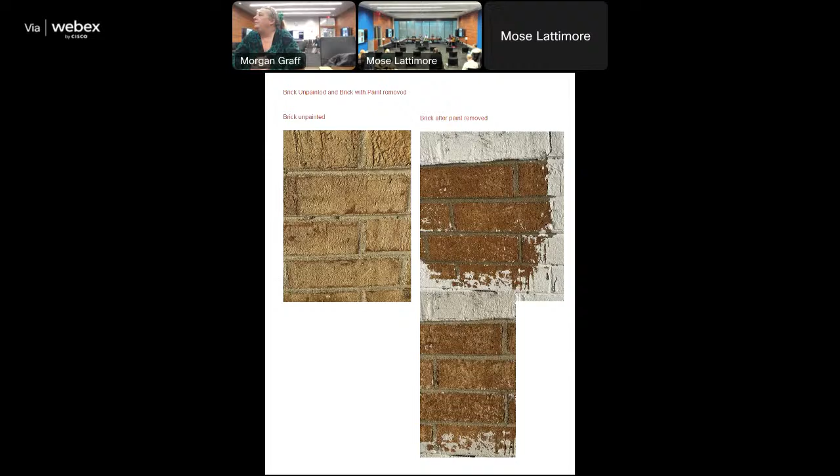Since you stated your name, can I get you sworn in? Do you agree to tell the truth and nothing but the truth? Yes, sir. Thank you, Ed Morgan. For the proposed work description, this is to retain the painting of previously unpainted masonry, paint house with mineral paint for submitted options. Staff analysis - I'm going to read through the last commission meeting minutes, if that works for the commissioners.

Sure. Following is taken from the unapproved November 8th, 2023 Victorian Village Commission meeting minutes. Commissioners asked the applicant whether they had any other options, as the commission is steadfast on this matter. Commission did not feel that another color would be appropriate either. Ultimately, the brick should be brick and it should not be painted. One commissioner pointed out that it is 1970s brick, not 1870s brick, so it is a very hard brick. Brick from the 1970s is not any different from the brick being made today.

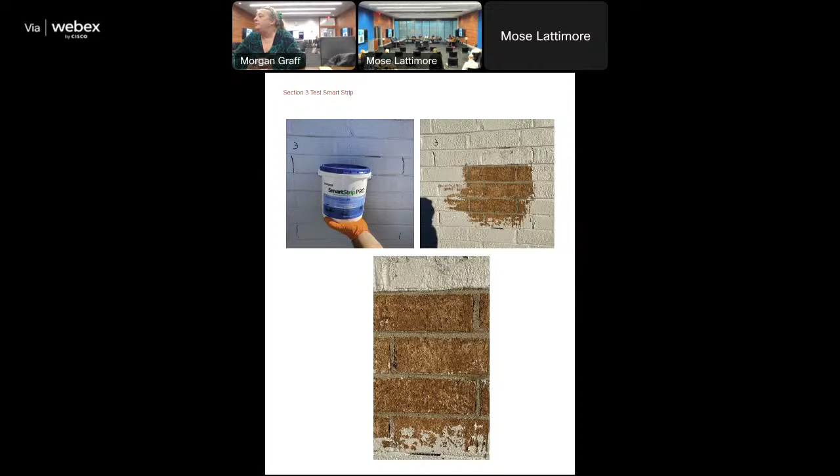With 1870s brick, you do need to be very careful as it is very porous, but paint is still able to be removed from the surface. The commission stated that they need to be very careful about setting precedent and need to adhere to Victorian Village guidelines. The applicant was encouraged to reach out to other experts for further advice about removing the paint. The commission noted that they still need more information about the product used and how it was used - for example, the dwell time and temperature applied, and any other information that affects the performance of the product - and asked the applicant to provide information about additional products that may be available.

The commission noted that different removal products work differently and some may be more effective than others. The applicant was encouraged to reach out to the paint manufacturer to get their opinion on whether the paint can be removed and what to use to remove it, or provide a letter from the paint company stating that the paint cannot be removed. The commission doesn't have enough evidence at this time to conclude the paint can be removed, so the additional information requested would help with this decision.

One commissioner suggested that a distressed painted whitewash brick with a 1970s mansard roof might be preferable to the fully painted brick. Another commissioner asked whether the commission would rather see an attempt like the distressed brick, or if they want to see the brick fully restored. The commission agreed that they currently don't have enough information to make the decision at this time.

The applicant was encouraged to look at other similar properties in their neighborhood for an idea of what could be accepted, and recommended to reach out to Columbus Landmarks for contractor recommendations. They may request that staff do a site visit in the future to see how the brick has reacted to the paint removal chemicals. Included with that is the November 9th, 2022 minutes and the October 12th, 2022 minutes.

As stated in the letter provided by the applicant and the materials, they have applied 3 different paint removers, which included Strip-Ease, Jasco, and Smart Strip. The paint remover products were then removed with a 4,500 PSI pressure washer after being applied for a 3-hour period with 60+ degree temperatures, and links to videos are included as well in the materials.

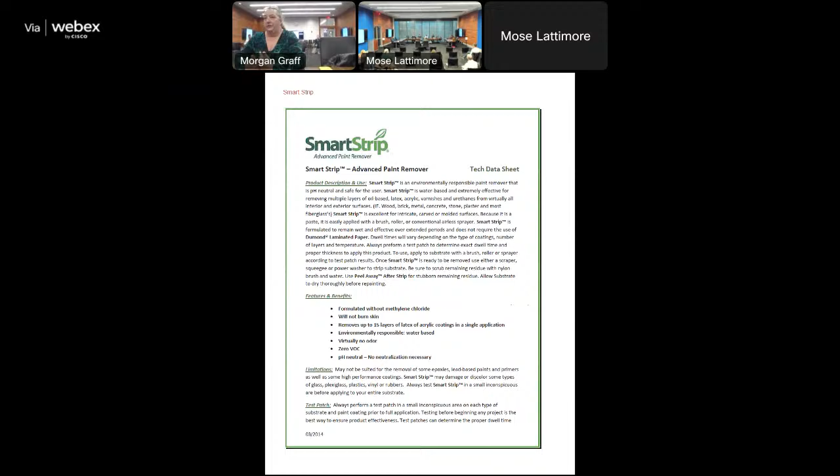The power washer, along with the stripping product, resulted in the bricks having damage and not taking them back to their original appearance, but to an orange stripped-down appearance. I'm afraid that with this other, more acidic product you have to use, it will also strip down and take off whatever coating was on them prior to us painting the brick.

We're concerned that it won't have a uniform appearance under the best of conditions, and trying to do a 2-story removal of paint is not the best of conditions. We think the building at this point would look best if a paint color was accepted by the Victorian Village Commission and the project was completed.

Or alternatively, because one side of the building is not yet painted—it's like 5/8 painted—don't paint the side that isn't painted, but just finish the painting on the sides that are in a color acceptable to the Victorian Village Commission, and not try to remove any more paint and do any more damage to the underlying bricks.

Thank you, that was very helpful. All right team, just thoughts, comments—I think the photographs, I think we have everything that we need or have been asked for. I think there's still one test that's left, the recommendation from landmarks, but I understand the concerns in terms of where we are seasonally right now, so this will offer some thoughts.

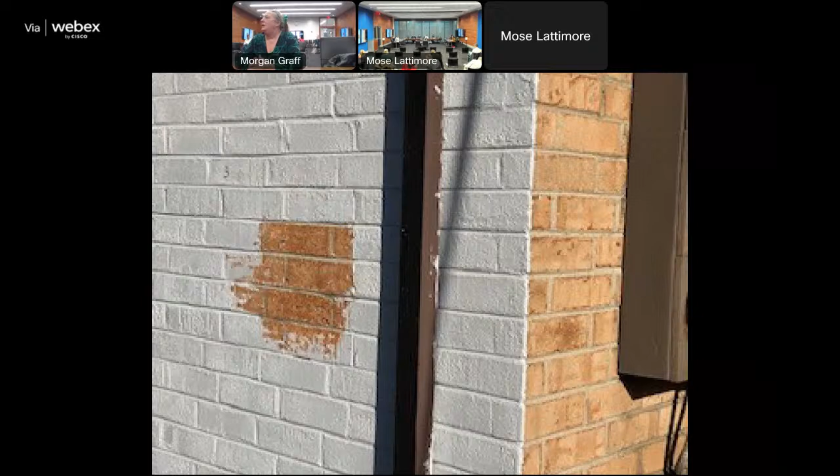Understandable, so I just think about that, and I'm not sure we can do it now during this hearing, but the applicant may be taking inventory of some properties in the area that may have similar conditions. I'm not sure if staff could help assist in that manner. We can try to find examples if there are any in the neighborhood, okay, just that.

Maybe that's an exchange that happens in this duration of time to better prepare for the outlook. With this motion of continuance, is April a good deadline, or should we extend it to May? I think it needs to be May because we don't have consistent weather in April. So yeah, May, it's a 24-hour application, to try for 24 hours. If we were to try that, it would be a little iffy, so May 2024. But we might be able to get something done prior to that. We will certainly try to, and if we do, we'll submit prior to that.

Okay, very helpful. All right, I think we have everything. Reed, do you want to introduce yourself, or wait? Wasn't sure if I needed to sit out since I've been coming late. Probably just through this application. Okay, I'll just abstain. And then we can call into record that Commissioner Dodson.

Is there a motion of continuance with the understanding that materials be provided in May 2024 to allow for these other landmark recommendations to be executed?

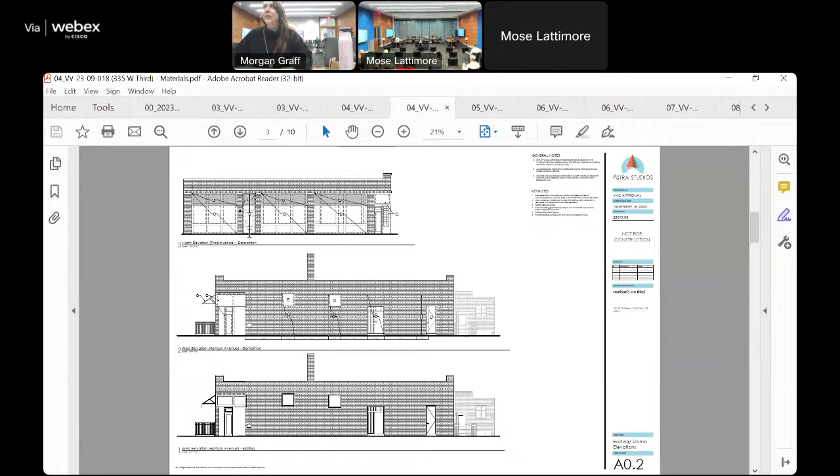Just teasing. Perfect. Can you state your name, get you sworn in? Amanda Dunfield. Do you agree to tell the truth, the whole truth and nothing but the truth? Yes. Perfect, all right, we're ready.

Proposed work description for 335 West Third Avenue: replace existing storefront windows on the north elevation with new wood glass storefront within the existing openings per submitted documentation. Install new masonry storefront openings on the west elevation per submitted drawings. Install new canvas awnings with steel frame tubing on north and west elevations, similar to the existing design per submitted documentation. Preformed metal gutters would run along the perimeter of the entire canopy. Install new patio space along Harrison Avenue and the rear south of the building.

Rear patio would be partially covered over the exterior bar with a new steel channel canopy per submitted documentation. The area would also include a new 36-inch cedar planter and plantings, as well as a 42-inch metal fence on the west elevation and a 72-inch horizontal cedar fence on the east and south elevations per submitted documentation. Planting beds would also be included on the east elevation, and four trees would be included along the fence line of the south elevation. Staff analysis.

The following minutes are included within this: November 8, 2023 — there's a lot, so no worries — and August 9, 2023. Staff recommendation: staff recommends approval of application VV 23-09-018, 335 West Third Avenue, as submitted.

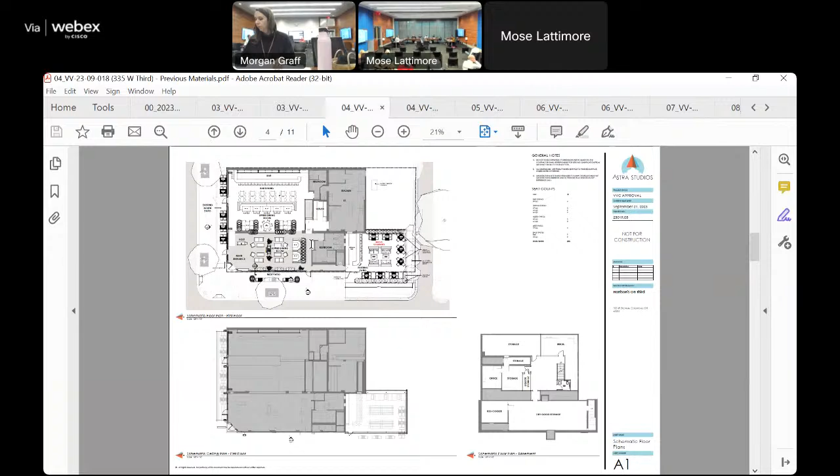With any and all clarifications submitted to staff prior to issuance of the certificate, with the following conditions: to select option 1 or 4 from the proposed sconces on the building, currently referred to as LT1 on the elevations; lights to be installed via mortar joints; and revised elevation drawings to indicate the location of the LT2 patio awning downlights to be included. Basis of staff recommendation is City Code 3116.11, standards for alteration, Short North design guidelines, commercial patios and outdoor dining, as well as lighting and signage, and projecting blade sign guidelines.

Thank you. Thank you, Morgan.

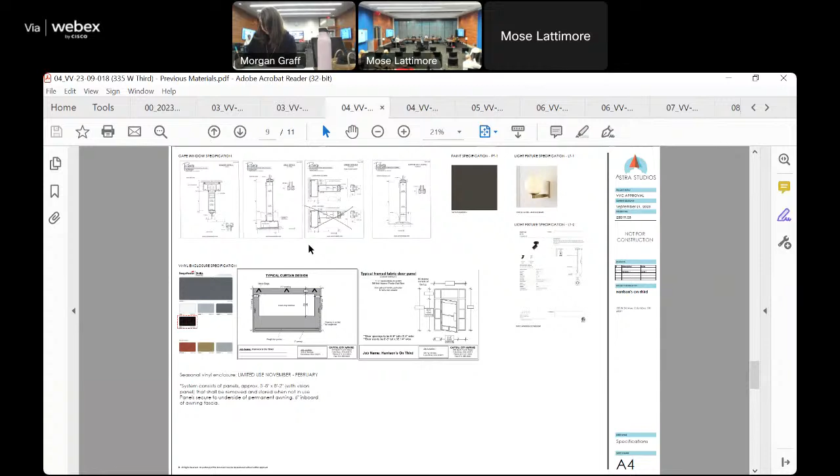I hope so. I don't know if we necessarily have to go through a whole presentation because it seems like everything's favorable in terms of going in that direction. But just high level, some of the things staff is recommending, is there anything we should really focus on regarding those items?

In your presentation too, so the things that changed from the last time we were in this meeting is we showed the awnings as they are on Third Avenue. They're going to be replaced in that same rhythm, right?

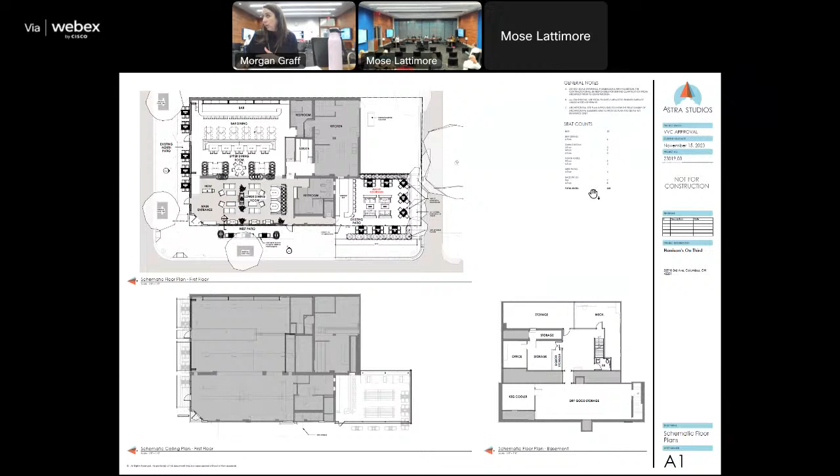And then the other thing was including options for the light fixtures, for the exterior light fixtures. And staff said they liked 1 and 4, is that correct? We would recommend either or.

Do you have a preference of the two? I don't know, I think one is more classic. The 4 is a little bit more modern. So LT1, I think, is probably it's simple and clean.

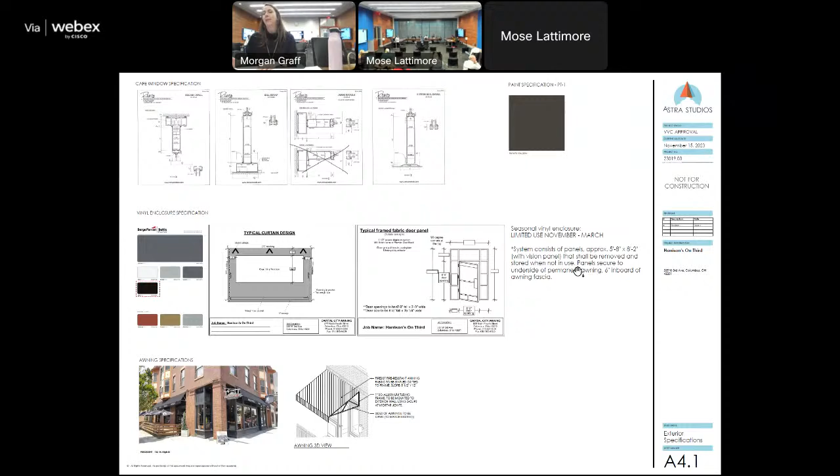It seems like LT1 and LT2 have a very similar fixture family, kind of presence to them, so it seems like it would be applicable.

So the only thing I was questioning, because I think everything else is here - as we go down into detail, I think we've asked before, we see there's planting material, but we don't know the age of it or anything like that. That's the only thing I see on this that really is not in the picture. Everything else is here, I would agree with that.

What the actual plants are going to be, specific species. So you feel like we could plant a 6-month-old boxwood and say, well, in 4 years they're gonna be 4 foot? Sure, that makes sense.

Now it might have been part of another application - was it in beforehand, previous materials? Yeah, I mean, I know we've had some of them called out. I'm just wondering where they are.

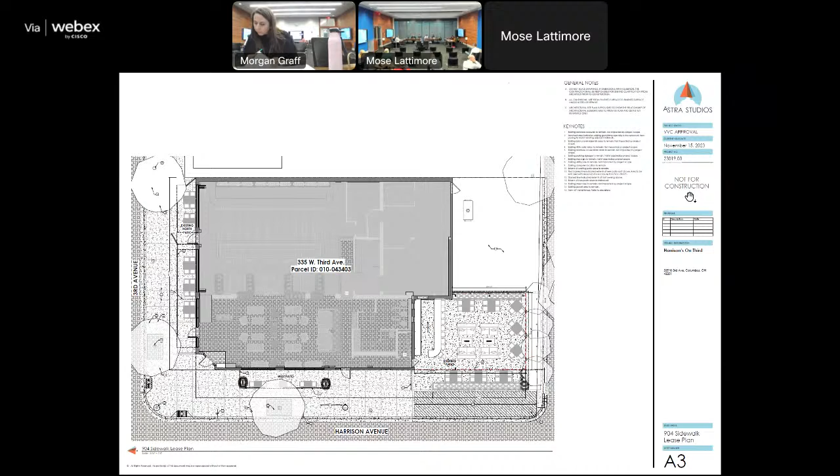And I'd be open for that being a broken out section, split out section that staff would put up, well just a separate little committee or subcommittee that can do that quickly. I mean, if you don't have it...

I'm seeing partial information that, you know, it's river birch or equal, or a note that says plant screening, but I'm not seeing anything that says exactly what it is. Installed sizes - I mean it might be all there, we just don't see it.

No, I know, we've done so many versions of this, granular. I mean, of course that level of information for plantings would normally come later on in this whole process.

Yes, so if there can be a staff approval, and I guess when we get ready to submit for permit, there needs to be a review to make sure that what has been agreed to here is actually showing up in the building permit. Is that correct? Yeah, so at that point it would make sense that that information would be in there.

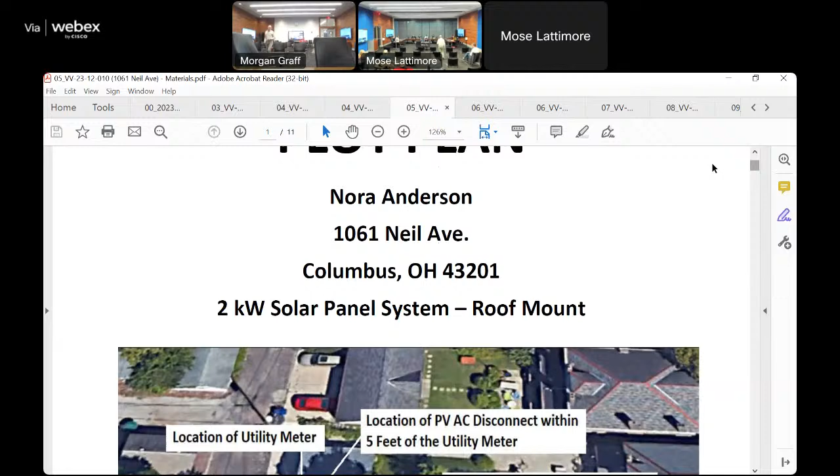Do you want to state your name, sir? Hello, and I'll get you sworn in. Sure, Peter Anderson. Do you agree to tell the truth and nothing but the truth? I am. Thank you, sir. All right, go ahead. Thank you.

For 1061 Neil Avenue, I'm going to abstain. Okay, that's it. You can stay there or you can, yeah, perfect. Welcome. Thank you, Commissioners. You're welcome.

So this is to install roof-mounted solar panels and accompanying equipment on a detached garage facing the alley per submitted documentation. Staff analysis: Columbus is to be 100% renewable energy by 2030 and carbon neutral by 2050. Clean energy can include sources such as wind, hydro, and solar. Use of renewable energy such as solar collectors is encouraged and should be designed, sized, and located to minimize any effect on the character of a historic building.

While the Victorian District guidelines do not currently address solar energy specifically, guidelines should be based on recommendations of the National Park Service. These include: preferred locations for solar collectors include sites raised in a rear or side yard, on the roof of an addition or secondary structure, or on the rear portions of the roof on the primary structure.

Locating collectors on the front portion of a roof oriented to the side yard is acceptable when preferred locations are not feasible. Minimize visual impacts by setting collectors back from the facade of the building. Install a collector in such a way that it can be removed and the original character easily restored. Mount collectors flush below the ridgeline on a sloping roof.

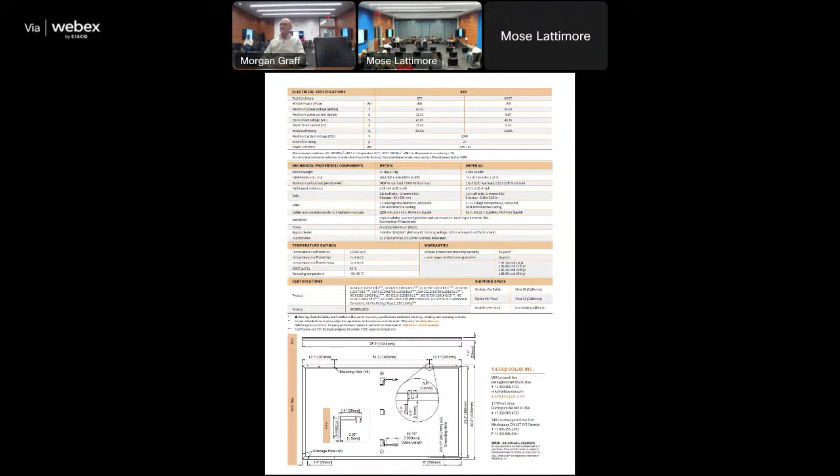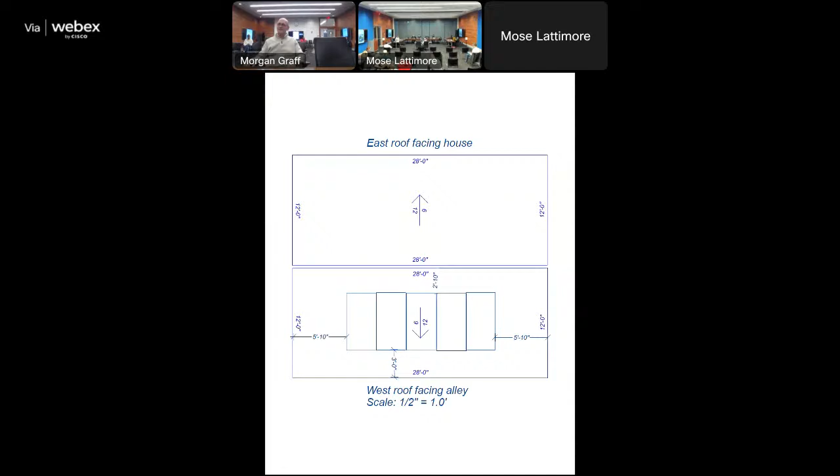So we looked to the garage. As you can see, the garage has a westerly facing roof — that's the proposed roof — and an easterly facing roof. We explored and did modeling on the easterly facing roof, which faces into the yard, but we have substantial trees that would need to be cut down to make this a productive site, and I'd prefer not to cut down the trees.

So with regard to the site, the only viable option would seem to be this westerly facing roof of the hipped garage. Some examples were provided for other garages — I think one may be in the neighborhood — and the garages I've seen have simple roofs that face north or south, as opposed to this one, which has the roof facing east and west.

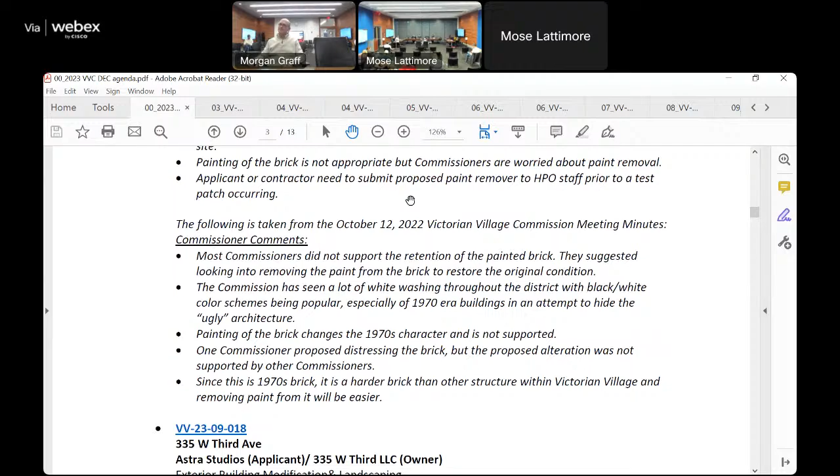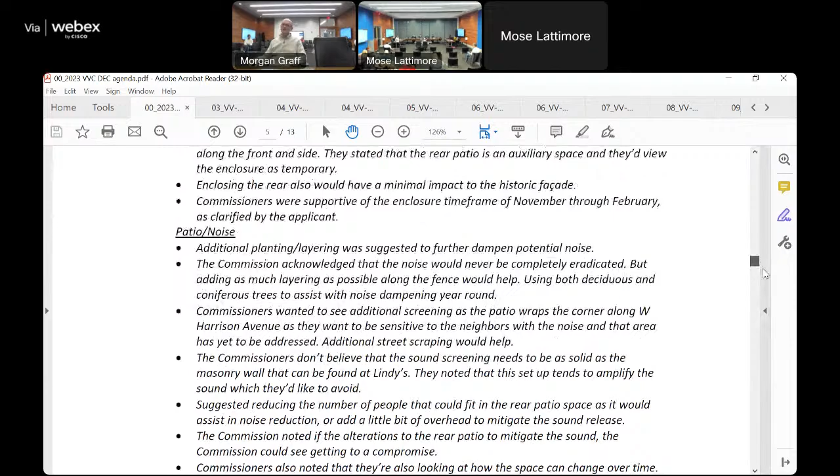Anything else, sir, before we talk through some comments? I think those were the two key concerns, and I wanted to make sure I addressed those. Yes, sir, they've been addressed — very helpful.

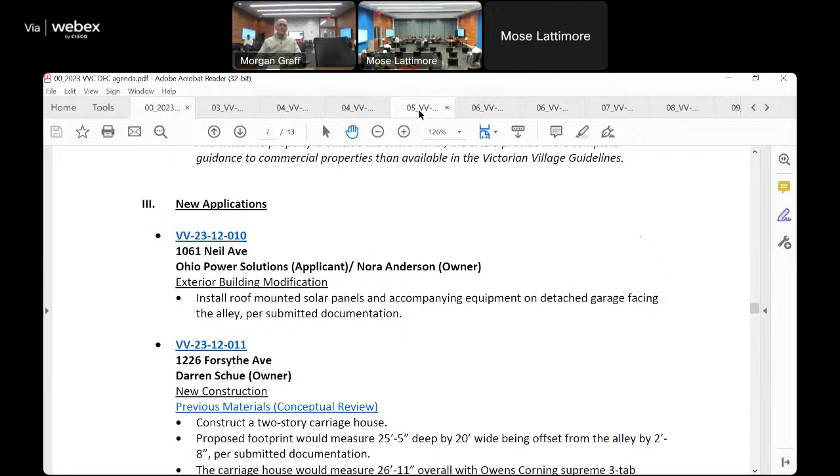My only comment — I'm okay with this application — is, when it becomes present on the alley, is it reflective? Is there a matte finish? Do you know what the finish is, as far as neighbors and windows go?

I mean, obviously this is where you're going to maximize flat panel, all on one surface, not very high up. But what is that finish? Because I would be kind of upset if in the winter or spring, wherever the sun rises, my curtains get fried because there's a reflection.

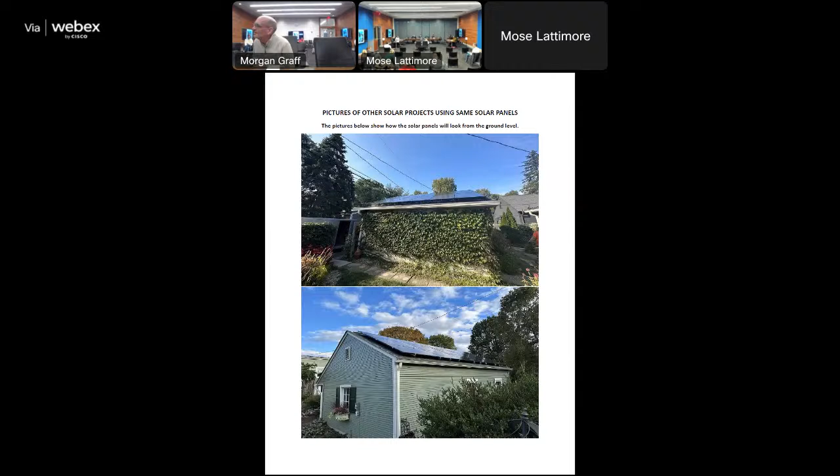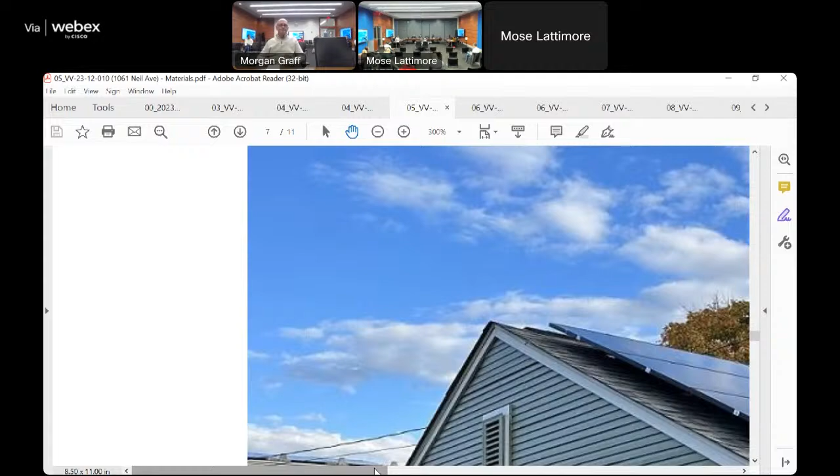I'm not the solar expert on this — there are pictures of two other garages where you can get a sense of what they look like. It would be helpful for us as a commission, since we're learning as we go with things like penetrating the garage and the disconnect boxes, if the solar company could provide samples — there might be a very reflective surface, a medium one, or a matte one. In your yard those things aren't reflective at all, but in other applications there is a reflection on that cell, so it would be nice to be able to see that.

So we would kind of know that going in, because what we're looking at there is sort of reflective. That would be helpful for us. I think you've answered all our questions and met our requirements. I'm not an expert enough on the type of glass, whether there's reflective or non-reflective versions. Can your supplier get those? I think so. I think the product is mentioned here - Silfab is the manufacturer.

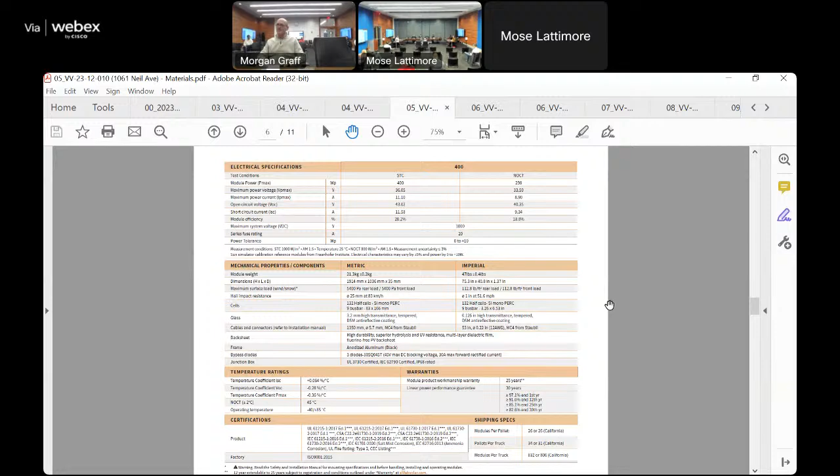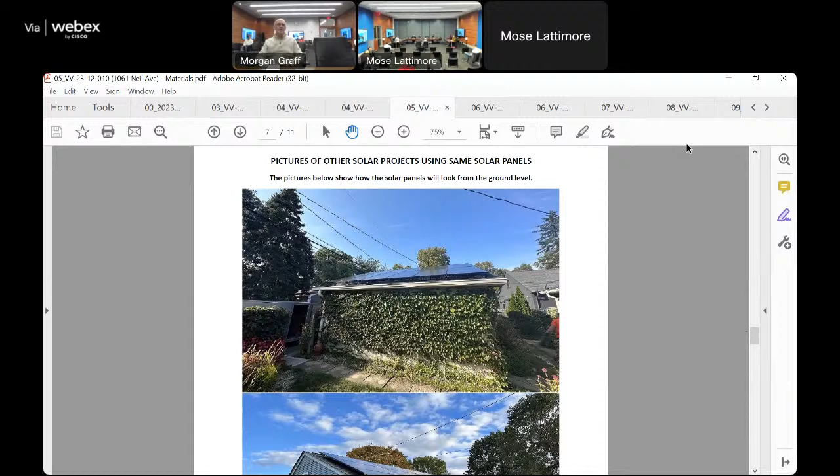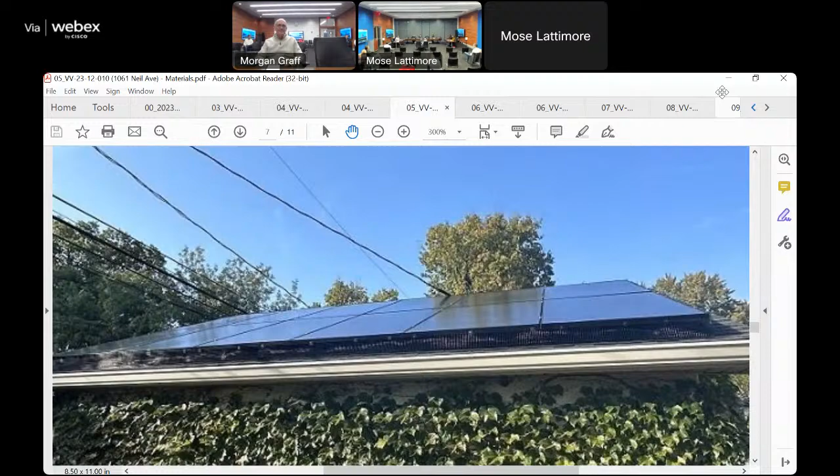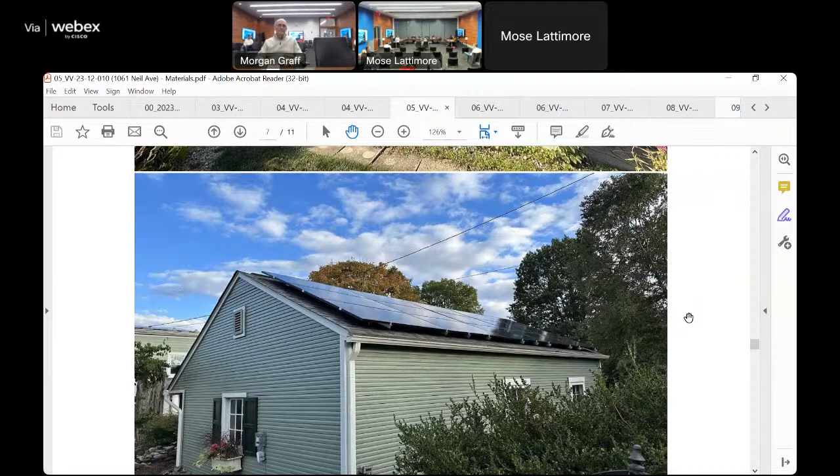I think that would be helpful. Would it be a recommendation that if the product comes in a non-reflective surface, that be used? Or what would you prefer? I'm not sure non-reflective panels are available, but if they were, the recommendation would be to use those. I mean, I'm not an expert on it. All I know is when I see the yard light or the thing on the side of the building, it's not reflective, but I see other installations on bigger things where it's definitely a reflective surface. That's what I'm trying to figure out. I'm sure we're into third or fourth generation cells by now, so they probably have different finishes. It would be helpful for us to get samples from your manufacturer, to make our lives easier.

Does it help that it has an anti-reflective coating specified? I don't know what that means though. Well, by design, the goal of a solar panel is to collect the sun, and anything that radiates back or that you'd see as visible light makes them less efficient. So it's in their best interest to have it be as least reflective as possible during manufacturing. So to your point, I don't know exactly what that looks like, but I don't think I've ever seen anything specified with different finishes, though I'm not an expert on it either.

I think that's fair. There's probably some inefficiencies, or maybe economies, related to looking at the main house - there are existing penetrations and such. But personally I still have a little fear in terms of the sense of presence, and how we can maintain an ability to screen them to be in alignment with other installations. I remember there was a pretty complex install proposed for an address on Second, that was on the second floor, broken up into locations.

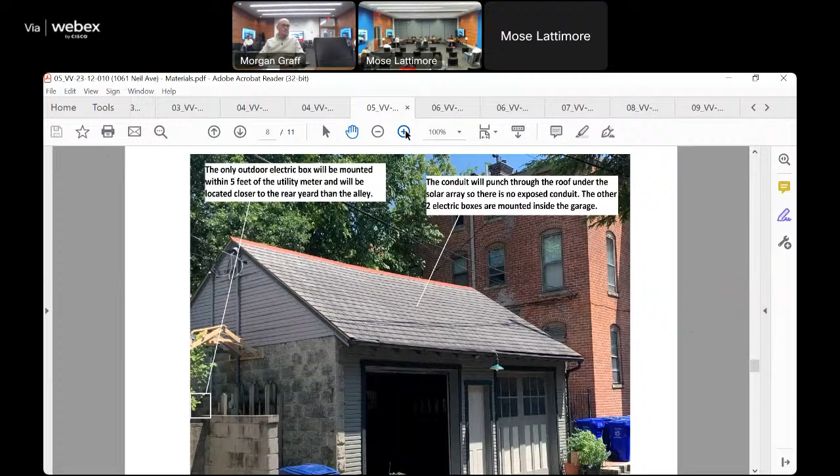I think you're right, you probably have a code problem if you try to put them on the back of the house, or on the south-facing side. My guess is there may actually be a code violation if you try that. I think we can only fit 4 panels, because fire code requires a setback from each of the ridges and valleys and any penetrations, and it's just not worth it - there'd be conduit running around to a disparate set of 4 panels they'd try to fit in.

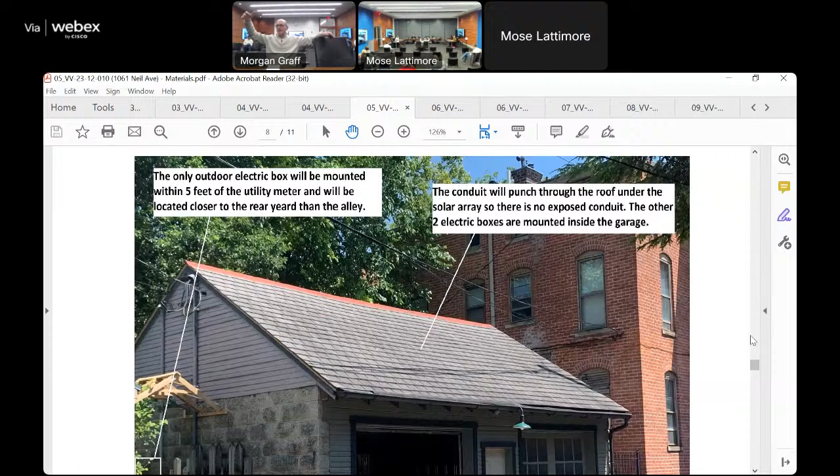Is there anything on the existing home - I'm talking about the existing southern face, on the smaller addition? Got it. And it's a four-square, hipped on all four sides, which leads to a more complicated roof pattern.

That was my preference, because it would be much more productive - high up above the trees, southerly facing - but it's not economically viable from a maintenance standpoint, nor from a productivity standpoint, with all the labor of putting in conduit and wiring, only to have 4 panels that can be positioned. I could potentially get rid of skylights, which might add a panel or two, but it's too complicated a roof.

It's your concern setting precedent. Yeah, completely, 100%. I think that we, as a collective, over the course of the last few years, when these things have been introduced, that's been the narrative. I understand some of the constraints, I just want to try to stay at least somewhat consistent. I heard in the National Park Service guidelines that secondary structures would be preferred, which is what this is. It's a secondary structure, for sure.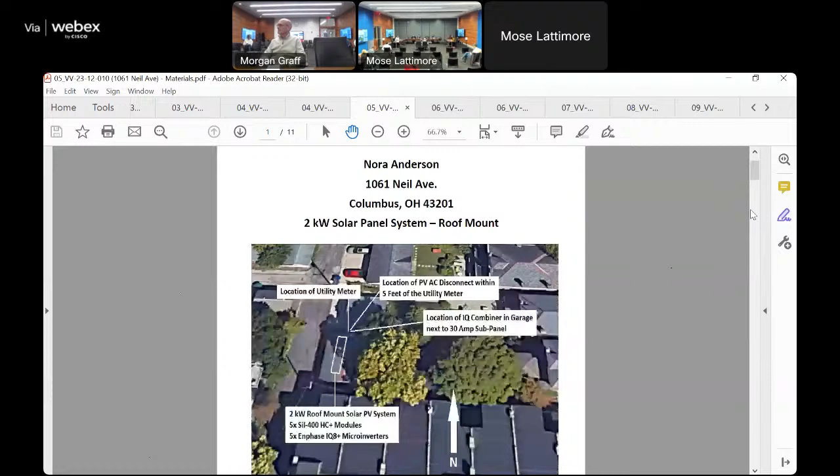We talked at the business meeting, and precedent is a concern. Could we wade the toe into the water by saying, well, it's on an alley, it's not on a street? It's on the middle ground. We're gonna get more of these, for sure. So I don't know that it's in the commission's best interest to be the guys saying no to all the solar applications.

Well, in looking at this, you look at anti-reflective - there's anti-reflective coating and there's anti-glare coating. So we don't know. Yeah, and I'm not an engineer.

The next question I would ask, if you really want to go there, is what are the angles of the sun and show me where they would face. Well, that's why we do sun studies in certain applications here. But I'm saying we can't be doing sun studies for every solar installation. No, but what I'm saying is this: we don't have enough information. All of a sudden we have this installation with this coating and it works within these parameters.

So we're not doing one-offs all the time, we start to build a kit of materials that are acceptable within the commission. We started with: does it penetrate or is it on the outside? Because the first ones came out on the outside, went along the side, and we said no. So we're building up this stuff. I think we need to know what we're deciding and not just go 'oh, it says it's not reflective' or 'oh, it says this' - because this is how we learn here.

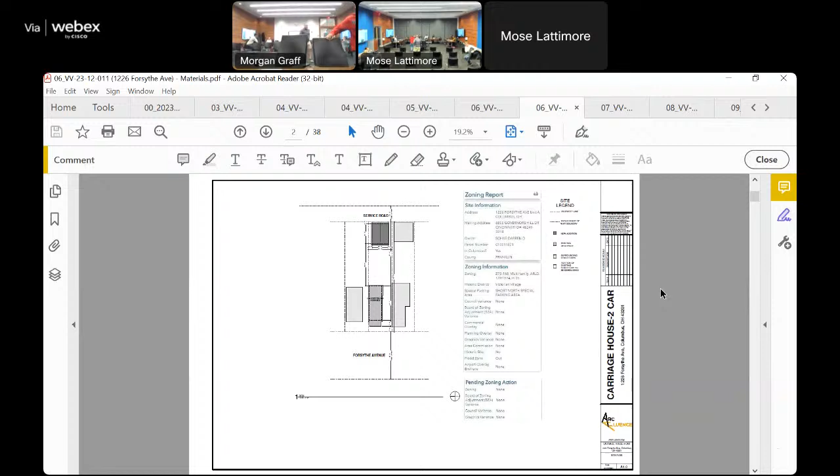Switch chairs. Look back there again.

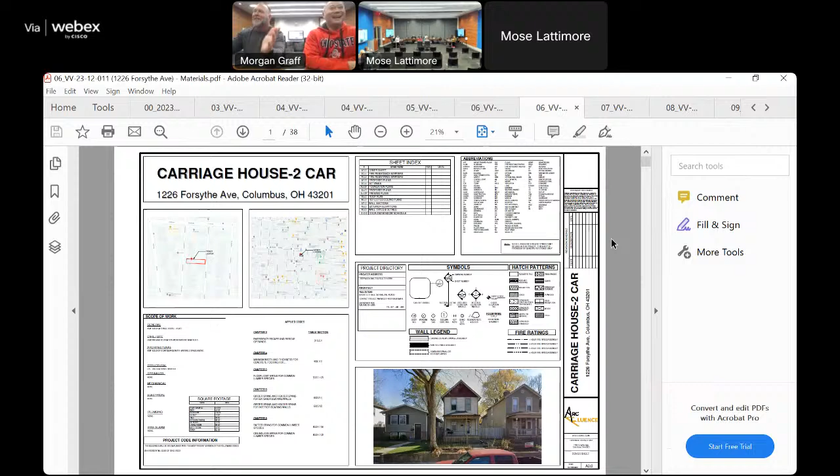Hello, family. Can you guys state your name, get you sworn in? Daniel Shu Hollander, Shad Morris contractor. Do you agree to tell the truth and nothing but the truth? Yes, sir. All right, thank you guys. Go ahead, Morgan. Thank you.

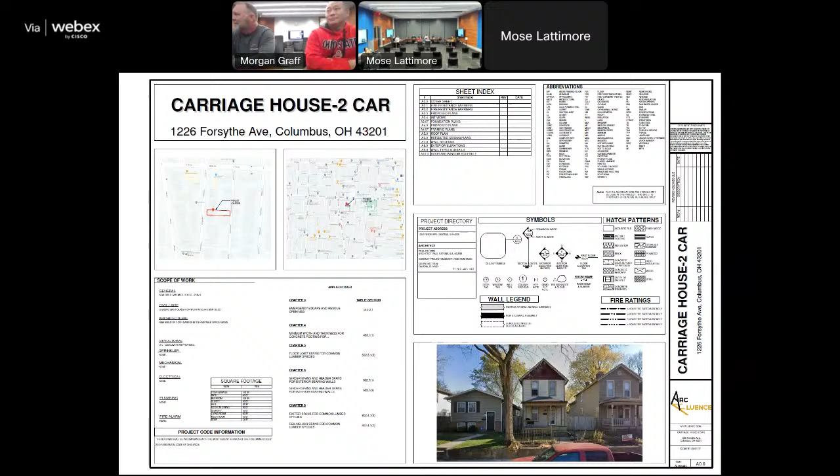Proposed work description: construct a two-story carriage house. Proposed footprint will measure 25 feet 5 inches deep by 20 feet wide, offset from the alley by 2 feet 8 inches per submitted documentation. The carriage house would measure 26 feet 1 3/4 inch overall, with Owens Corning Supreme 3-tab shingles in estate gray. Windows would be Marvin Elevate 2/2 double hung.

Staff analysis: the following is taken from the approved October 11th, 2023 Victorian Village Commission meeting minutes. Commissioner comments on the proposed carriage house: the massing looks off. The house and garage need to talk to each other, and the carriage house should complement the house. Commissioner suggested scaling it down.

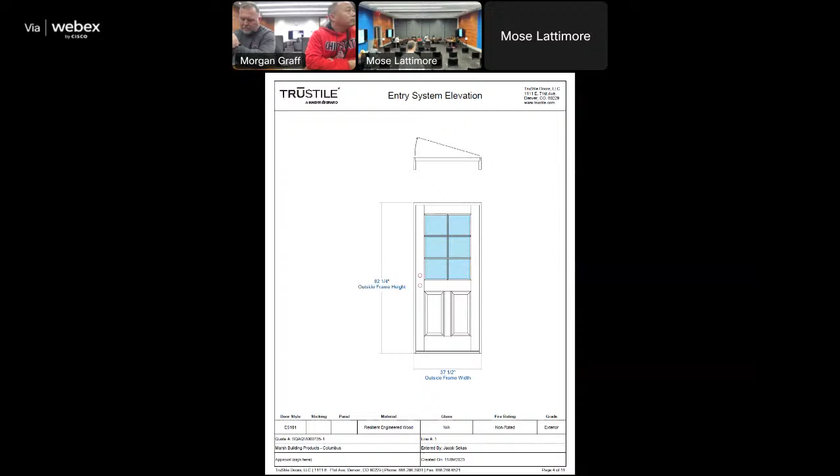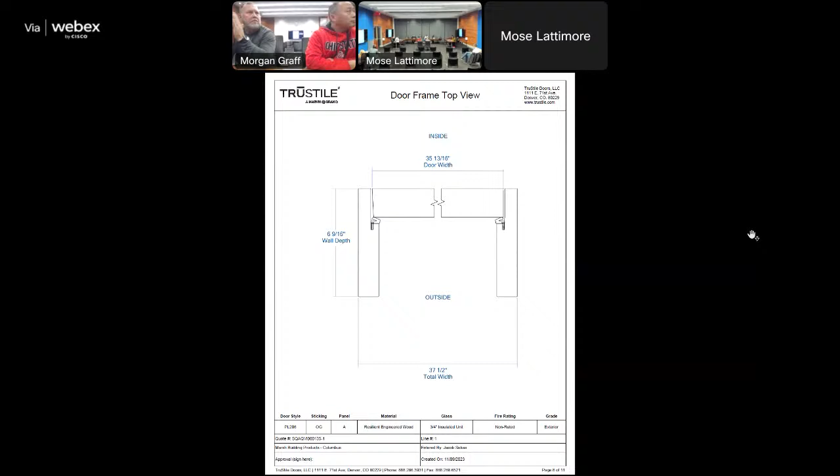A story and a half may be better to fit into the existing context than the proposed two. Having 2 dormers on the sides with a front-facing gable roof mirroring the roof of the house may also assist the structure in being more appropriate. The applicant was encouraged to look at the proportions of the lot and site to ensure everything balances in the end. Preliminary scaled measured drawings are needed to understand the massing. Commissioners request an elevation drawing of the site, including the proposed carriage house, and a scaled measured elevation drawing of the alley to see how the proposed structure fits in with the context around it.

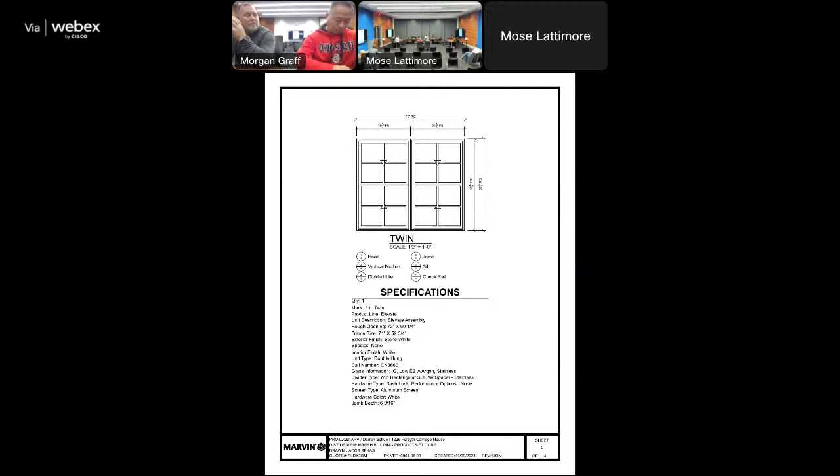At the December business meeting, Commissioners had the following requests and statements. Commissioner noted that the carriage house seemed tall and the proportions felt large compared to the house on the lot. Commissioners noted that context is important and requested photographs of other buildings facing the alley to understand the garage's context. A section drawing for the carriage house was requested so the commission can understand why the building is so tall. A massing elevation showing both the home and carriage house was requested to see how the buildings interact with each other. One commissioner asked why the 3 windows on the west elevation are offset from the center.

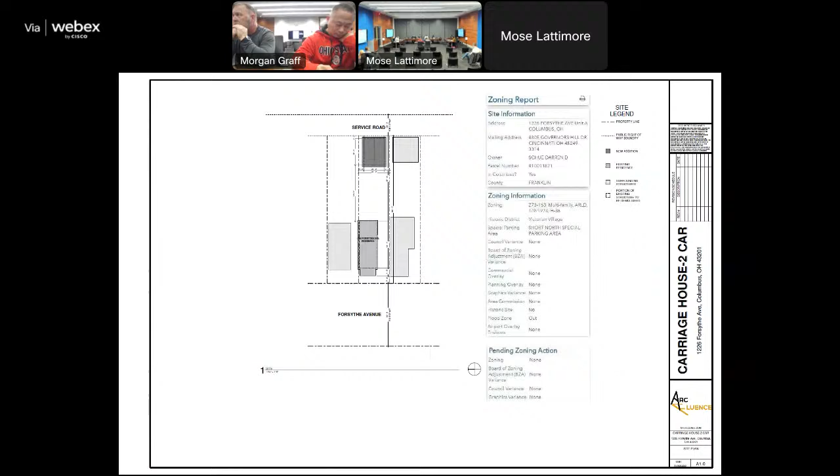The applicant has supplied updated site plans as well as elevation drawings, and submitted the following responses to the commissioners' business meeting feedback. They supplied views showing the garage scaled to the house, as well as views and renderings of the proposed garage and alley context. The building was similar to the house in surrounding context, scale, and height, with the roof being slightly lowered from the main home. In response to the 3 offset windows on the west elevation, the reason they were offset from center was due to conflict with the interior wall. The elevations have been adjusted so all windows are symmetrical and appropriately aligned.

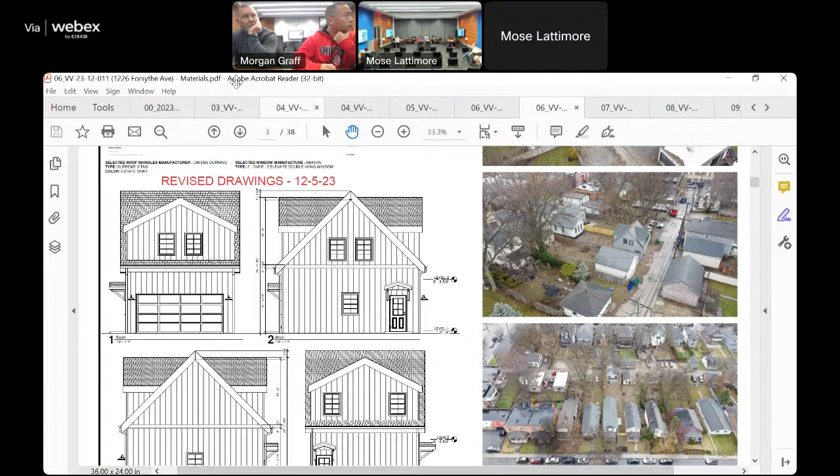Staff note: as viewed on Google Street View, the existing garages on the alley are single-story, 2-car garages. Staff recommends that the applicant contact the Department of Building and Zoning Services to ensure no variances are required, and for the applicant to consider 2 separate garage doors instead of 1 single garage door. If one door is required for the turning radius, the applicant should look into making it appear as 2 separate doors.

Staff recommends a continuation of application VV 23-12-011, 1226 Forsythe Avenue, to allow the applicant time to bring their proposal in line with applicable city code and guidelines. Basis of staff recommendation is City Code 3116.12, standards for new construction, and Victorian Village guidelines for new construction. Thank you, Morgan.

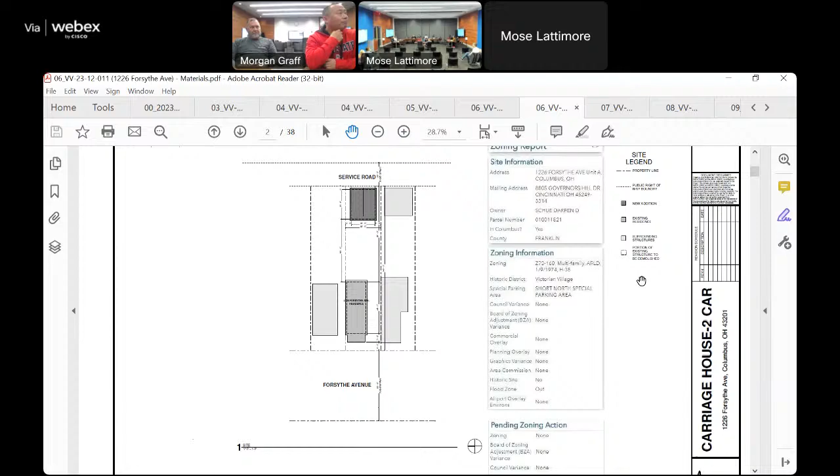What I'm saying is when you squint, there's this piece, which is the carriage house, and there's this other piece of the same magnitude, which is the house, with a one-story addition on it. So what we were saying is these things talk to one another, they're both equal, one's not submissive to the other, being here's my main building, here's my outbuilding. Well, the house is considerably larger than the carriage house when you put that first story addition on the back of it. But if you're looking at the house and that garage and the massing within that garage, they're basically equal. Living space, I would say no, but that's where structure sizes differ.

From the computer generated images, we've never gotten to the point where this drawing really tells us what we're looking at. For sure, I think that's what. And that's where we're at right now.

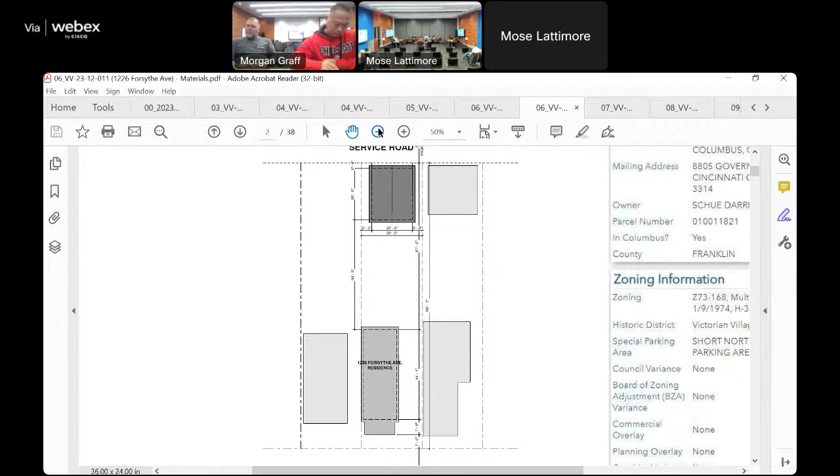Yeah, and I think that makes sense, Jeff, because during those conversations that's why we were asking for a composite drawing, to really get a feel for what we're seeing. Because if you only look at the carriage house without the sense of context, you can't answer that question until you see it. And that's very helpful, the information you're seeing.

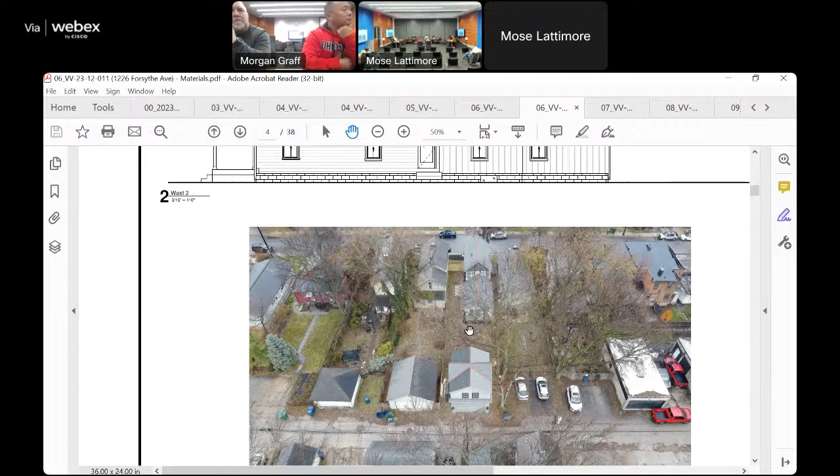Yeah, I think one picture does show this carriage house, that's the one that shows how this carriage house looks in the back. And I guess what I'm saying is that, to Jeff's point, Jeff hasn't been able, nor has any of the other commissioners been able to say that until the review of these composite drawings. Right, so, oh yeah, there it is.

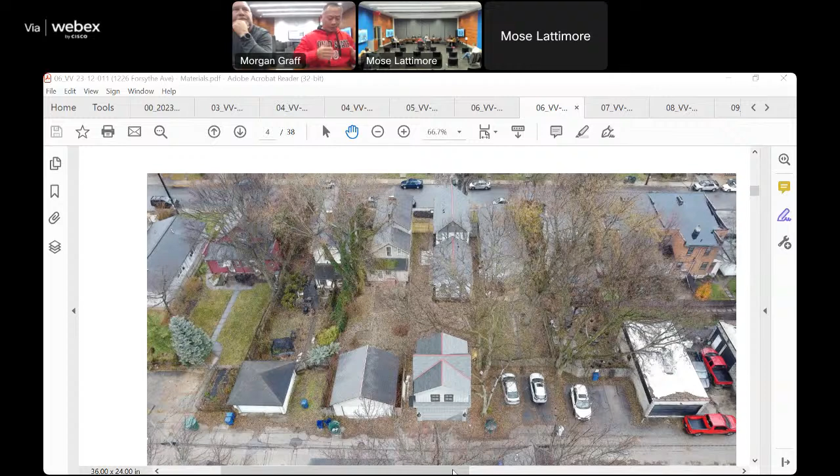There's a couple views, this side view, and there's a couple pictures I think they show, and some of the other carriage houses in that alley are proportionate to, maybe even a little bit bigger than, what we're proposing. There's one on the opposite side of the alley, a little bit further down, and you can see how it's sticking out a little bit. Yeah, that's the same proportion as their house also.

Yeah, so we kind of looked around the neighborhood to see what's there, because you always say look around the neighborhood and see what's around there. So we're trying to take your advice. And then go back to, oh there it is, that gray one, okay, now do you see your carriage house there, the white one?

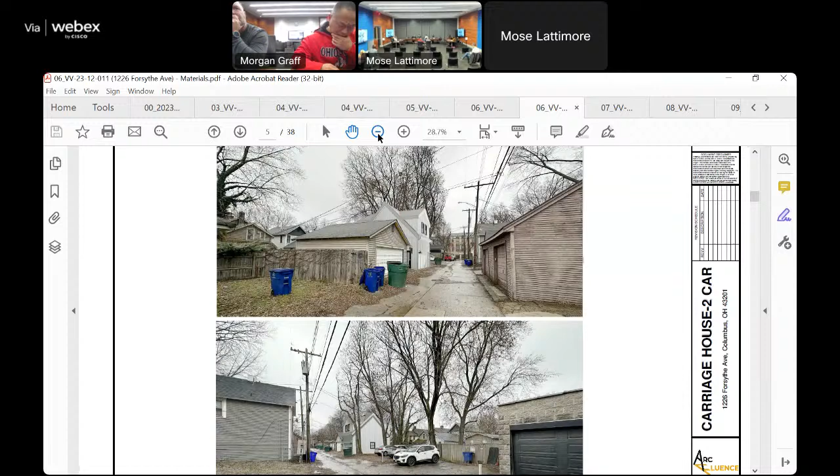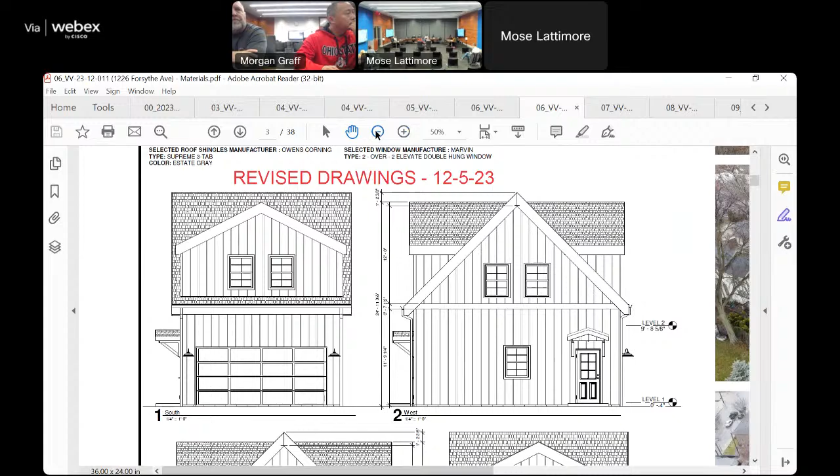Okay, when I look at the south elevation, the distance between the top of the door to the eave is a telltale sign that you're trying to get height somewhere. That's probably 3 foot that could be brought down on the height of that thing, where your roof line is, it's not this, it's this. Now, does that mean I'm going to have 9-foot ceilings upstairs? Probably not. Or am I going to have 3 feet of storage above my cars? Probably not. And that's what we talk about with massing and program when we look at these things.

What, can you slide back that way a little bit? Right there. What's at the top left of that picture right there? What's the max height on this project?

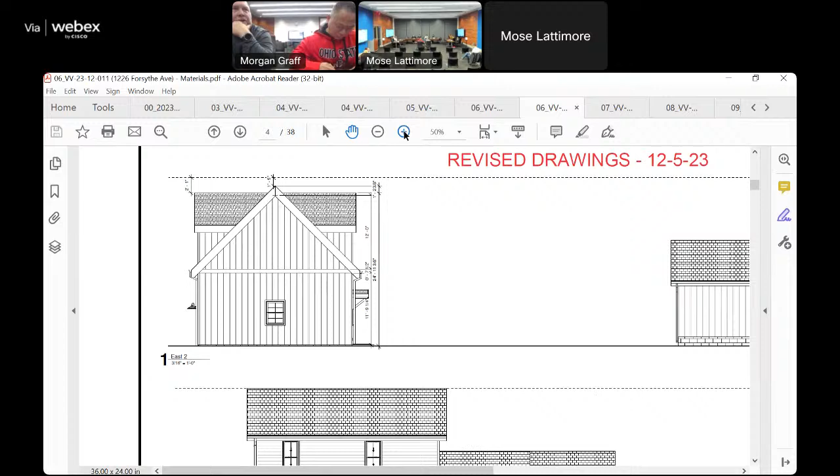I can't quite read that one. It's almost 25 feet, I think, proposed. 24 feet, 11 inches and 3/8.

Okay, we can't— I don't think, I talked to the architect, can we lower the garage? The architect said no, you have to have the minimum requirement for how the garage is per the zoning. We've got to have at least 8-foot ceilings. We can't drop to a 7-foot ceiling inside the carriage house to get the square footage for building codes.

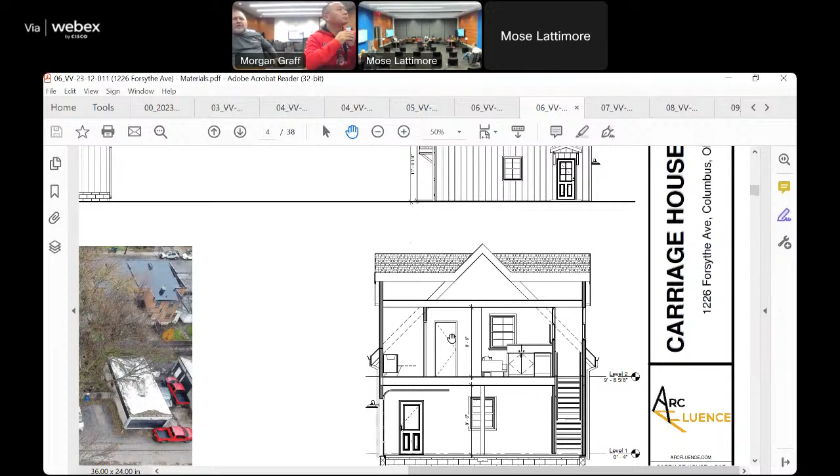And you can't really go to a flatter roof. I see what you're saying. If you go flatter, but with the width of this thing only being 16 or 18 feet wide, you have to have a good pitch on there for the rain, for water to run off.

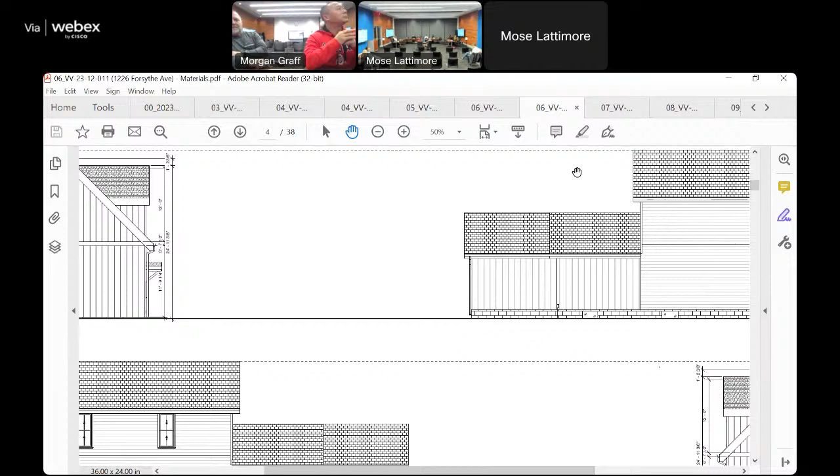So wait, that's another problem. No, come on, go up. I want to see the section. Oh, the section, yeah, right there. Yeah, right there, and then the right corner section. Yeah, let's zoom in on that. So what are those heights?

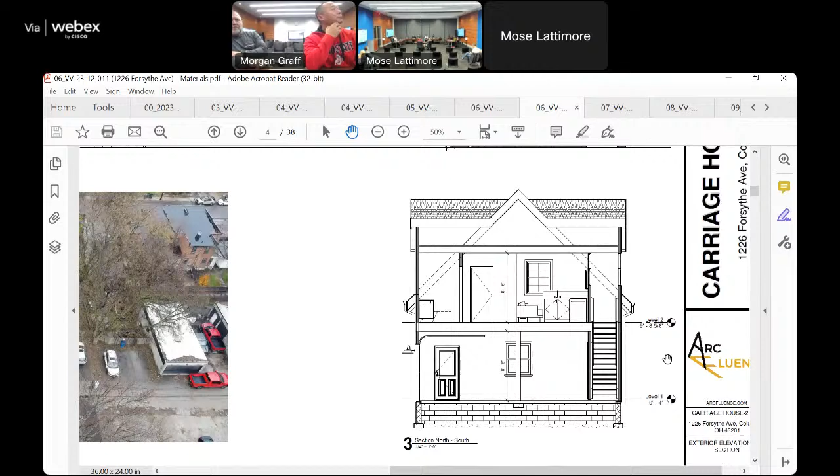That's 8.6 to the lowest. That's not 8.6— so you're talking, that's a full 8.6. That's a huge height in a carriage house. Okay, so we drop it down 6 inches. Is 6 inches gonna make that much of a difference?

Yeah, the height is 8.6, that's— yeah, I mean even if we drop it 6 inches, is that gonna give us what you're wanting? So something's not jiving here, because the elevation of that— you're right, you're right, I see exactly what you're saying.

If you look here at the garage door track, as an example, and how that relates to where the eave is, it looks like those are fairly close together, relatively speaking. But if you look at how the house is rendered on that alley view, there's like— I don't know, maybe 2 feet— but you've got several feet above the garage door before you hit the eave, and that's what I think Jeffrey is saying doesn't fit right.

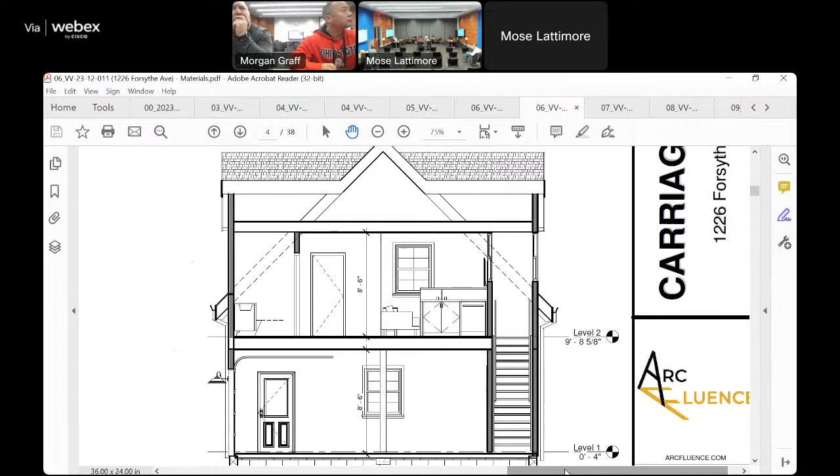Can you go back one page? And go up to, or right there, and then upper left, what kind of south elevation is this? I mean, I don't think that's to scale. I see what you're saying. That's a huge space right there. Exactly, so that's not reading the same as the other.

But there's no dimensions on that far left one. See what I'm saying? There's no— well, I mean, there's dimensions on the right one, which is the same height. And if it's not to scale drawings, then we have— no, it should— I mean, that's the back of the house right there, or the side of the house. Right.

Okay, so I guess I'm just lost on— let me, go ahead. I'm gonna go ahead and just try to see if we can kind of help move the conversation forward a little bit. So can we just go around and offer comments on what we're seeing, and then we'll give the applicant a second to clarify anything real quick, so we don't have as much back and forth, if that's okay.

So, does anyone have any observations they want to share quickly? The only thing I would say— we've said this about many big buildings, some of the people in the audience have heard this from us— from a big building standpoint, there's too much program and the scale is too big. I think that's the easiest way to say it.

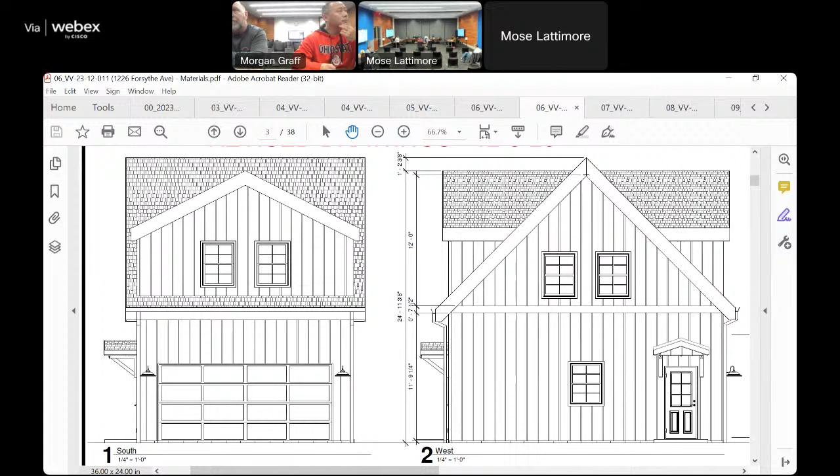That's correct, from the HPO office. So as long as we're going down that road, make sure the doors and the windows and everything follow the guidelines. I think the doors are okay, I believe, aren't the doors and windows still the same material? Maybe I'm wrong. It is Marvin Elevate, that is an approved window.

I'll note the configuration of the window itself is not typically what we see for an appropriate style of window. Same thing with the door, it's typically a single light instead of a six light opening.

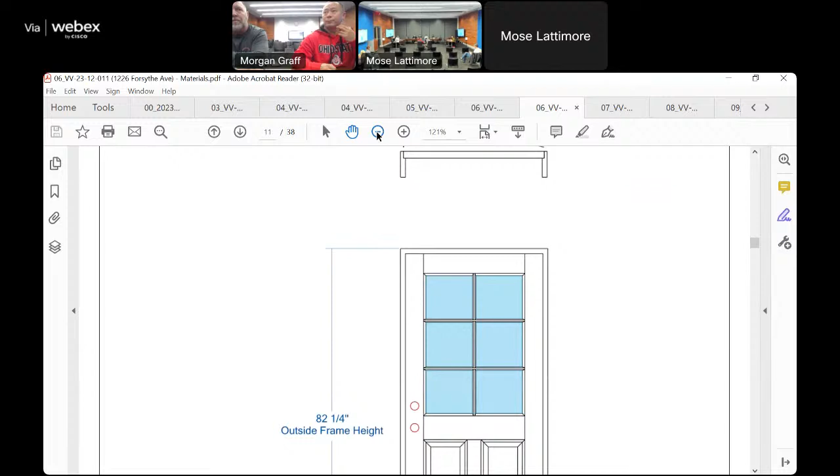Yeah, I think these are things that, if you remember on the previous home review, some of these things came up too. I think it'd be helpful. Just think about the proportion of the windows right now, they start to feel residential. So if the architect goes back and looks at some of the information we've gone through on the home addition and the replacement of some of those windows, that should carry into this concept. I think that would help us.

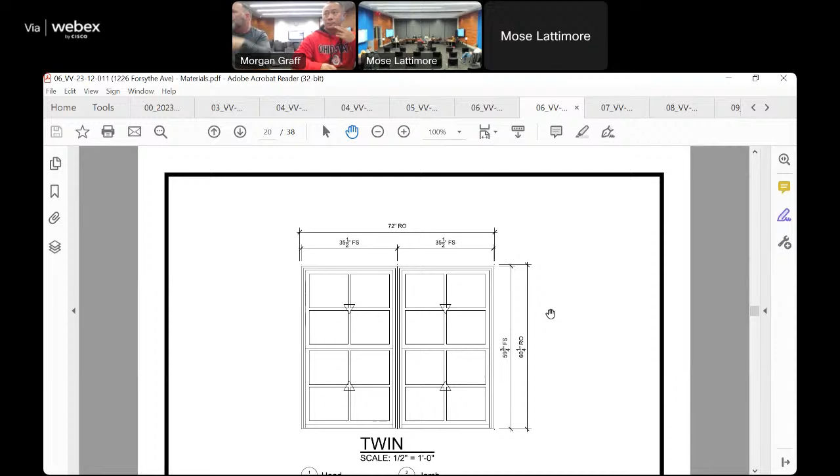Right, and it'd be the same windows that we put on the house, so that way it all matches. I think it's those proportion things. If you look at the house, where you've got the house and the garage, you can see nice tall windows in the house and then these little squat things on the garage. You just make sure that it all talks the same.

Anything else we can do to help? Win the lottery? You gotta buy your ticket.

Exactly. But I think that we've had a great conversation on the home. You got to a good spot on the home, and I think that was a positive result of what we worked through. The home's done. So, hopefully we can take that step here soon.

Anything else? Nope. So, motion to continue?

Motion to continue VV 23-12 011, 1226 Forsythe Avenue. Is there a second? Second. All those in favor say aye. Aye. Any opposed? Motion passed.

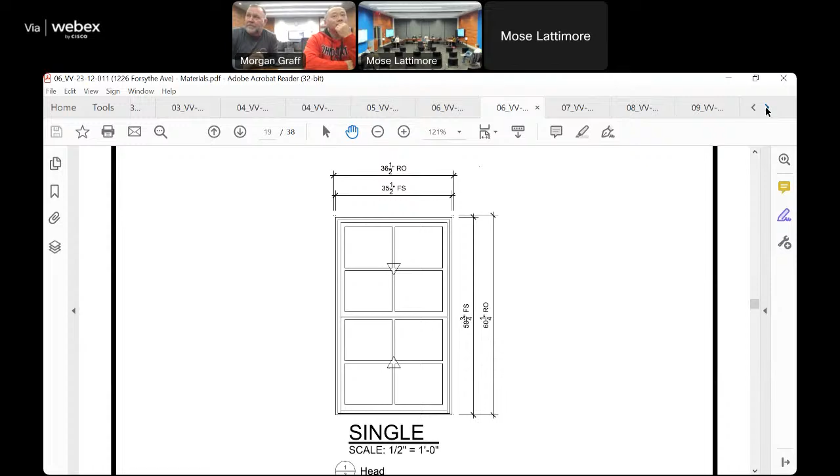Thank you. Thank you, sir. Appreciate your help. They'll probably be knocking down your door to be on the tour. Get your name out there. Bring up the charger there. Thank you, gentlemen. Bye.

Alright, on to application VV 2312-012, 30 Christ Avenue.

Hello, can you state your names and get you sworn in? Jessica Sharon, Kirsty Hussing. Perfect. Do you both agree to tell the truth and nothing but the truth? I do. Thank you. Go ahead, Ms.

Proposed work description: install faux foliage on previously approved wall sign, AV 2306-017A. First, a bit of documentation. Staff analysis: the canopy sign was previously approved in June 2023. The sign was approved with the condition that the faux foliage was not part of the approval.

At the November business meeting, commissioners had the following requests and statements: the elevations renderings don't show the plants as hanging. If the plants will be hanging, please update the elevations renderings to reflect this.

The commission asked whether the installation is intended to be permanent or seasonal, as greenery year-round may look out of place. The commission had concerns about the greenery fading. Please provide additional product information, cut sheets, and proposed plants. Please provide the height of the wall sign from the ground.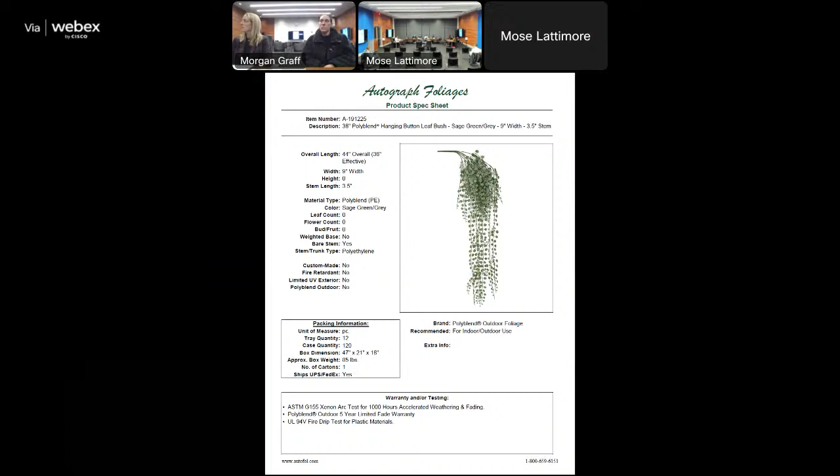Applicant responded to the commissioner's business meeting feedback with the following: the plants will not be hanging, they will be laying on the canopy. Applicant will be bringing samples in for the meeting. The greenery is proposed to be used as an accent to the signage.

It is of very high quality materials. The applicant is very focused on the exterior aesthetic and feels it will integrate into all seasons appropriately. The greenery is UV rated, has been tested for 1,000 hours against weathering and fading, and has a 5-year outdoor fade warranty. Applicant is budgeted for and prepared to replace the greenery after the 5-year mark, although the vendor has told them it could last as long as 10 years before experiencing any fading. Applicant has provided spec sheets for proposed faux foliage as well as the height of the sign from grade.

Staff note: HPO does not encourage the use of faux plants. We recommend exploring other decorative signage alternatives to the faux plants. Staff recommendation is to continue application VV 2312-012 to allow applicant time to look into alternatives for the canopy sign. Basis of staff recommendation would be City Code 311613, standards for site improvements, letter A.

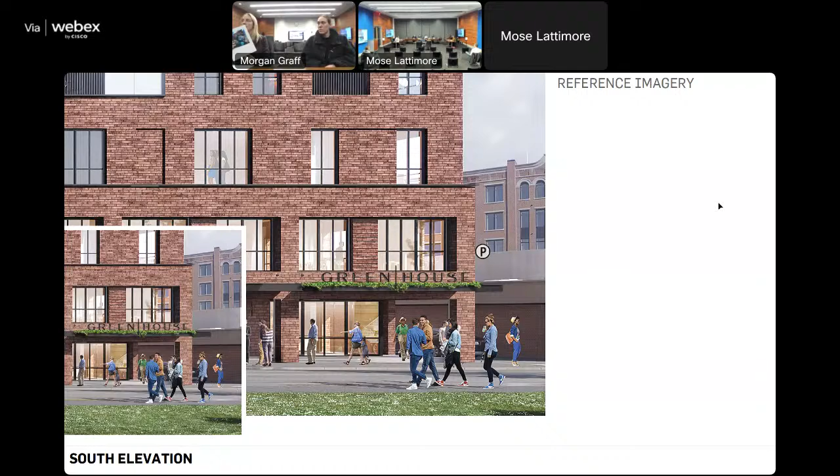So we have worked with Oakland Interiors to find some faux greenery that we think looks really good, especially from the perspective of the ground level looking up. We actually have some photos. We worked with Oakland Green Interiors on an installation at Gravity Phase 2 that we're super happy with. Granted, it just got done this summer, but I think we've had some experiences now with them to know what looks really good and what's not gonna look so good.

We've touched and felt this, Brett has touched and felt it, so understanding from a historic perspective it's maybe not favorable, but especially given the context of the neighborhood and the Short North component of it, we feel really excited about it. I do want to clarify one thing if we do want to pass this around.

It's shown this way just for ease of, from what our vendor gave us, but how we'll do it is it will be installed within strips, and the strips will lay on the canopy sign, so it won't hang over. That's why I really feel it will be more of an accent to the sign and less this cascading green piece that is really like a feature.

So the rendering, just to clarify, it wouldn't be the rendering, it'd be more about the color elevation, right? Yeah, correct. The rendering was from probably 2020. Makes sense. Awesome.

Anything else? I didn't mean to interrupt. No, I think that's it from our side.

Thank you. All right, so team, I know we're passing this around and kind of getting a feel for it, but obviously, any thoughts? I think they've kind of talked through the things that were discussion topics when the sign came in originally. Was the UV, understanding how, what is this thing gonna look like over the life of the particular project or the sign itself.

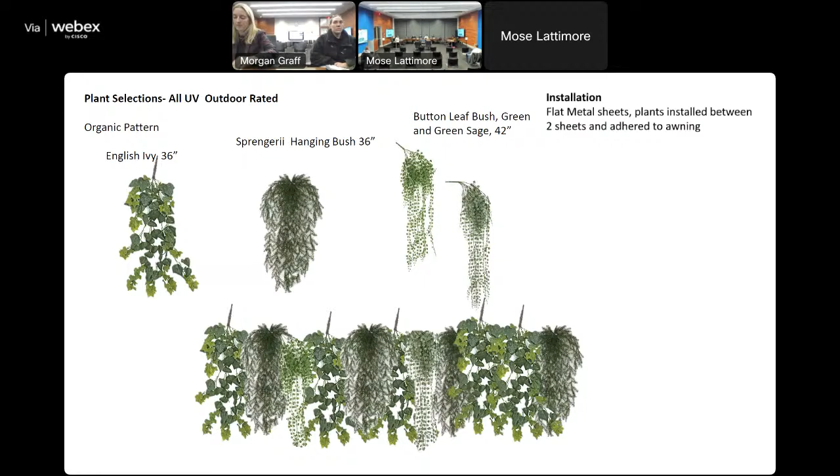Okay, so if I'm looking at the section, the channel that holds the sign, does that channel return on either end as a tray? Or is it open or in? On the short ends, basically? Yes. I think it returns on both sides. The canopy returns, because it also holds the sign within it. It's like a box in that way. Okay, okay, just...

I recognize the kind of stance on trying to stay away from faux plant material in general. I think this is a unique application as a sign slash art kind of installation, given the thoughtfulness to the containment of it, and the modest amount that I think we'll actually read through, I don't have issue, personally.

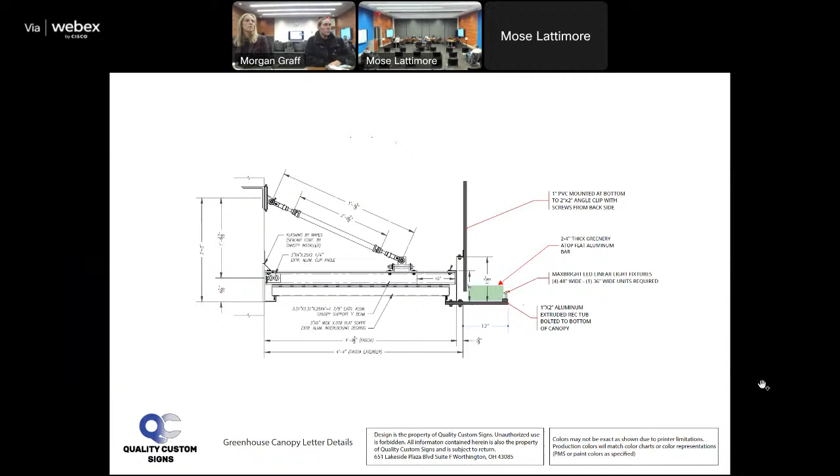Any other thoughts? Yeah, I just think, I agree. I think this is a situation where it's kind of auxiliary to signage and it's not like planter boxes that are filled with a bunch of fake plants, right? This is really an accent to the signage and not really faux planting per se, that generally is discouraged. So I think from my perspective, I'm fine with it as well.

It's not a hill we want to die on. Correct. I mean, it's very discreet. It's, I think, just very limited to a particular signage and it's not, I think it's gonna look nice, but also I don't see anything in the guidelines that would prohibit something like this.

Yeah, I would agree. Just everything, obviously, that's why I was asking about the containment. And I think we took the right steps first, right? Is the sign itself, I think, is not dependent upon the accent. So let's just say that's the permanent thing. If, over the years, this thing doesn't necessarily weather right from that perspective, or there's some concern, it is just the accent. So we wouldn't be stuck with something that was integral to the sign. So I think that gives us a little bit more comfort in that regard.

And I would agree, Reed, it's tough to try to understand, Rob, if the guidelines really speak to this as kind of this element. Yeah. So the only concern I have is about maintenance, right? So I think you said it has a 5-year warranty and 1,000 hour UV testing, which, just to be clear, that's less than a year of exposure to the sun, right?

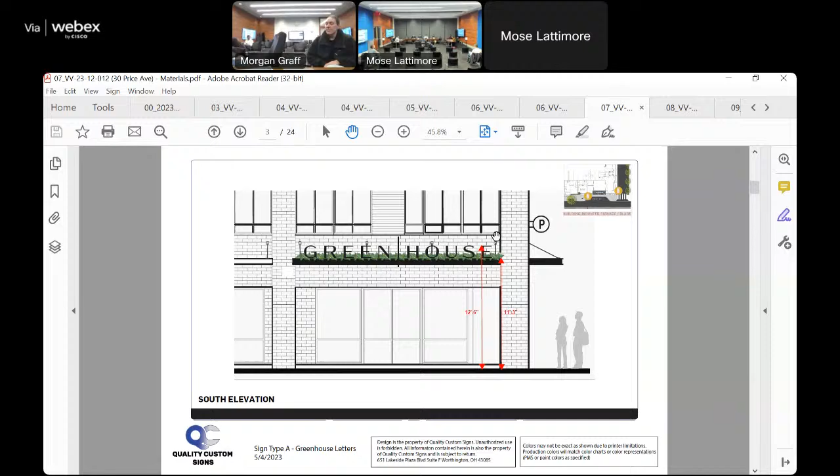Alright, applicant is the same for the number 8 application, VV 2312-013 for 30 Price Avenue. Applicant has already been sworn. We have another. Yeah, okay.

Can you state your name, sir, to get you sworn in? Sure, Andrew Lundberg. Do you agree to tell the truth and nothing but the truth? Yes. Thank you, sir. All right, go ahead.

Proposed work description: install an 8-foot 5-inch tall and 7-foot long ground sign per submitted documentation. Base of sculptural ground sign to be 2 feet wide and include uplighting per submitted documentation.

Staff analysis: landscaping and hardscaping were previously approved in February 2023 under VV 2302-004, which mentioned an outdoor sculpture piece to be added in the location now being proposed as a ground sign. HPO staff informed the applicant that ground signs are generally not appropriate per the Short North design guidelines unless there is no other feasible sign option.

However, if they are the only feasible option, the height may not exceed 5 feet measured at grade, including any mounting platforms or sign base, and the maximum allowable area is 10 square feet, including any mounting platform or sign base. We recommended at the time that the signage be revised to align with the Short North design guidelines for signage.

At the November business meeting, commissioners had the following requests and statements: the commission noted that seeing the sign in plan view would be helpful, please include the landscaping in plan view of the sign, and the commission requested HPO staff include the previously approved COA for landscaping in the packet, which is included.

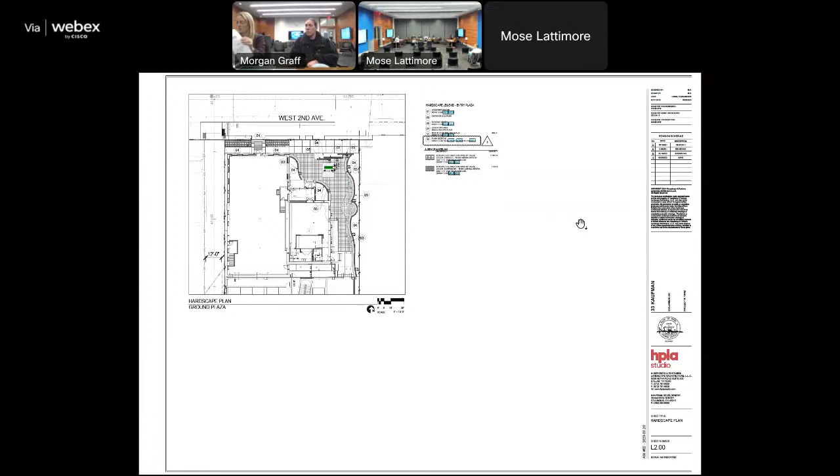Staff recommends to continue application VV 2312-013 to allow the applicant time to look into different design options for the signage. Basis of staff recommendation is the Short North design guidelines, signage, page 3.39: new ground signs are not appropriate; however, if they are the only feasible option, the height may not exceed 5 feet measured at grade, and the maximum allowable area is 10 square feet.

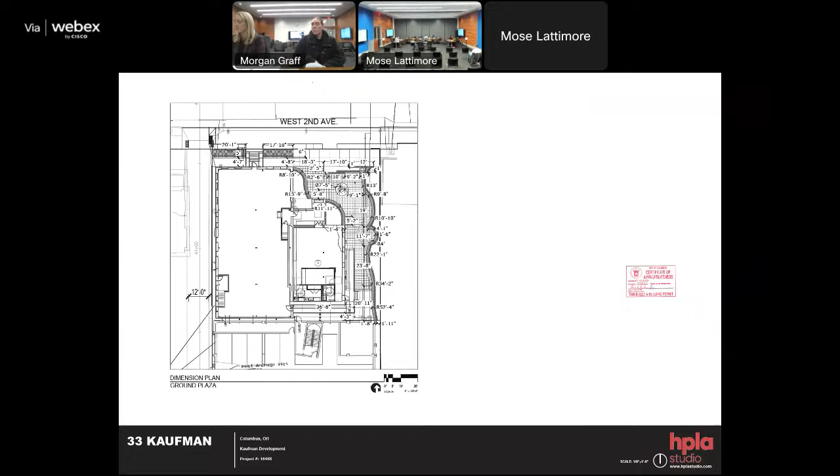Thank you, Morgan. All right, go ahead. For the record, I'm hoping this is our last application, maybe not the last meeting, but the last application. So this is Andrew Lundberg. I'll speak first and then hand it over to him to give a little bit of detail.

He's an industrial artist. He's done a lot of stuff around town, if you're familiar with the Slingshot in Franklinton, and a handful of other things. One of the things that's interesting about this application is we wanted to do an art piece here in this location, and that was the origination of what we were doing. Then we realized that because the building is set back off High Street, and it is our leasing office, there's probably some necessity to have a sign component to that sculpture.

So we're viewing this in two different ways: as a sculpture that has a 25 square foot sign on it. I think the city could be viewing it in both ways as well, more as a sign, so that's something we probably need to discuss. But the sign component itself is 25 square feet, relatively small. The sculpture could exist without the sign - we would not love that, but it could.

The sculpture really incorporates some of the elements we're using on the interior of the project, and again it is evoking the greenhouse brand and the greenhouse name of the building. So I'll hand it over to Andrew to give a little information on the sign itself, and then we can answer any questions.

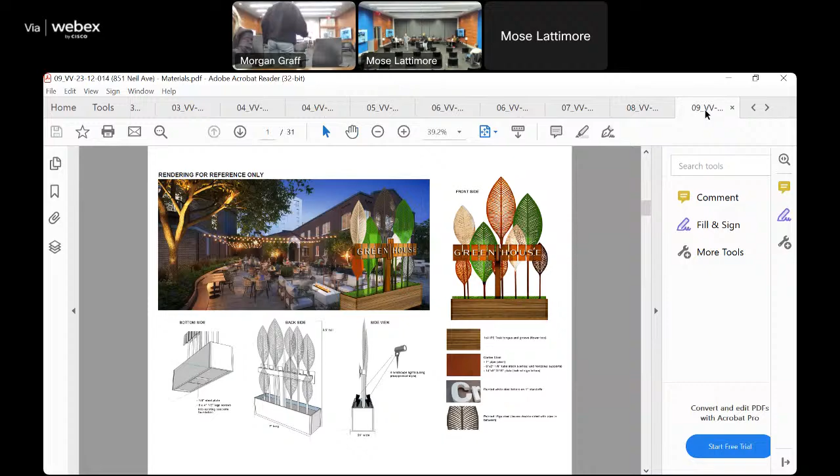All right, we're on to our last application. This is conceptual, case VV 23-12-014, 851 Neil Avenue.

Thank you for sticking around, sir. Sure, appreciate it. What did you learn? A lot, actually, I have my own opinions about this. Could you state your name? Dominic Bianconi. Did you agree to tell the truth, the whole truth? Yes. Okay, thank you, sir.

Proposed work description: replace existing retaining wall with a 1 foot 11-inch brick retaining wall per submitted documentation, with the plan to be graded behind the retaining wall. Staff analysis: applicant initially applied in early November. After initial review, HPO staff informed the applicant we would not support increasing the height of the retaining wall or the grade of the front yard, as the change would not be compatible with adjacent properties. Additionally, we would not support mixed fence materials, with iron fencing installed on top of the brick retaining wall, based on Victorian Village Guidelines, page 28. Staff recommends setting the fence back behind the retaining wall and replacing the retaining wall with the height currently on the property.

Staff recommended that the current submission be presented to the commission under conceptual review, and the applicant has since removed the iron fence from the design. It will just be the retaining wall.

After the November business meeting, commissioners had the following requests: they asked the applicant to provide photographs of the homes on either side of 851 Neil to show front yard conditions. Commission clarified with the applicant that the height of the existing retaining wall is 10 inches, and requested information about how the retaining wall returns around the side of the front yard, how far back it will return. Commission noted that the transition between the yards will be very important.

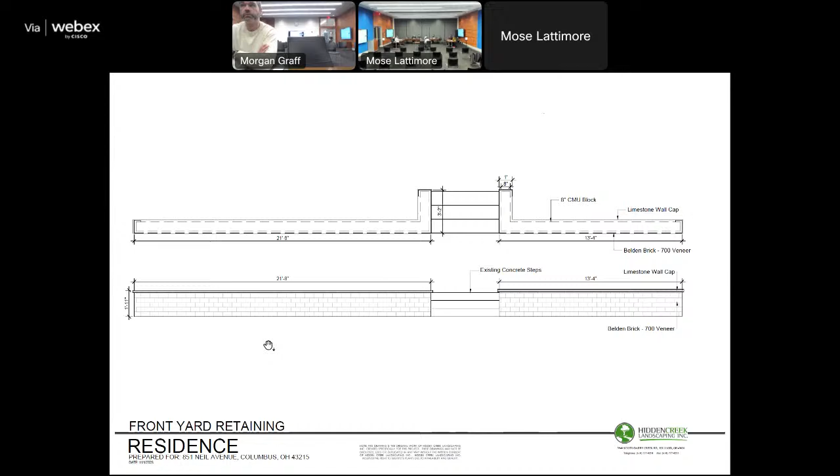5 inches... if you scroll through, 17 inches. What address is that? 861... 861 Neil, we could. No, it says right here, 17 inches. And that's, I think, the closest to the subject property, because that seems reasonable.

Yeah, the question is how tall is his third step, because I think something like that would work well. No, I think that, I completely agree. I completely agree.

If I may, for 861 Neil Avenue, it was originally approved, I just read it, I apologize. Was originally approved in... where did that go... 93, it was supposed to be at 15 inches in height. Was that approval? I'm not sure if it changed over time, but that's from the record of that COA for 861 Neil.

Because it's interesting, so you see 1135 is 24 inches, but then you see 1065 Neil Avenue is 24 inches, and this one's 23 inches. Maybe it's how these are photographed, but some of these look bigger. I think that 17-inch with the right proportion works if it works with your steps. For sure, agreed.

I'm willing to acknowledge it's a factor of material too. Obviously the site conditions, the steps, the material selected - not necessarily just the arbitrary 24. Now it might have been 24 inches, might have been appropriate from the standpoint of the brick, right? Because you're on course, it's coursing. There's certain things related to brick that might have made the 24 inches alongside the step condition too as well, you know what I mean?

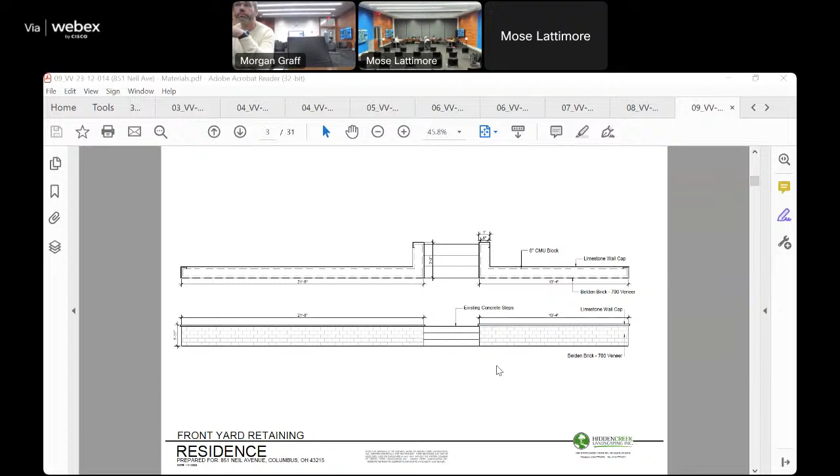I'm going to offer the applicant any thoughts on what's being discussed. How do you see it - if we were to stop right now, how would you move forward?

My follow-up question is a bit more about the materials you would prefer in contrast to the brick. The only driving force of the brick was to match the home facade. But if we're trying to match something else, I'd love to hear what that might be so we can explore different materials to match your feedback.

My thought is, let's say we want to use some kind of natural stone, and you say you want to maintain the current height of the wall as close as we can. Then with that stone, as you were saying about the courses, the only way we can do that with that material would lead us to between steps 1 and 2. And then you'd come back and say, well, we don't like that - can we add another one so we end up at the top of step 2? Or is it going to end up halfway between 2 and 3? I understand where that's going.

So I guess my question is, what we want to do, if I'm understanding, is find a material - I need some feedback on that. And then with that material, we want to be as close to maintaining the current height of the wall while balancing with the steps, correct? Is that right? I think that was an excellent explanation.

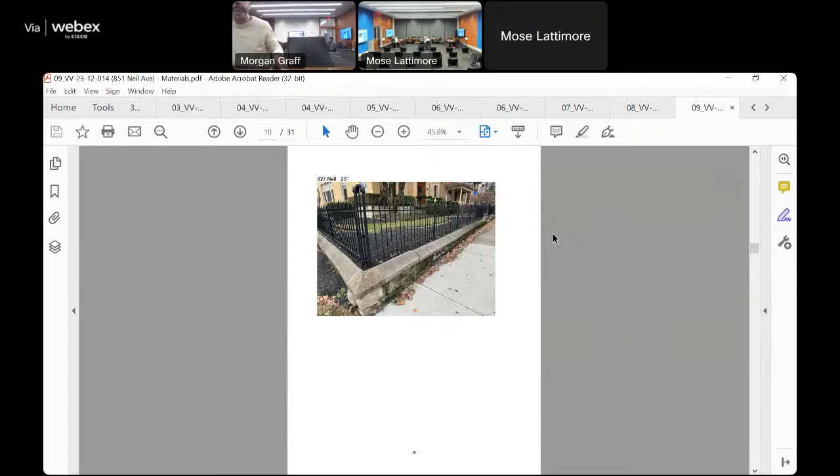I think 1027 Neil Avenue, with its 17-inch wall, would be a good example for you material-wise - and Tim, you can chime in on this - in terms of what it would look like. The home that's just - sorry, which one is it? 1027 Neil Avenue. Did I take a picture? Yeah, it's right there. Sounds recent.

Yeah, it's the texture to that - the texture and how it meets the step, you see it, that it actually meets the step, depending on where yours are. You're going to have to do a tie-in pretty similar to that, because there's no retaining wall on either side, right? Yeah, I think I labeled this one in the top pictures. And if you talked about incorporating the brick facade, you can incorporate this stone in other parts of your landscape, so you bring the two things together.

Certainly, not just within the wall. Yeah, we weren't 100% on brick, we just thought - but I think that's probably your best option. This complements the foundation, that's kind of what you're trying to match, the foundation of the house. Yeah, do you think the steps are limestone or sandstone? They're just concrete. It's hard to tell from the picture.

So you're in a difficult strip, kind of like misfit toys of different kinds of retaining walls around you. Not misfit houses, no, misfit retaining walls - where it's like you have none, you have some that are concrete, it's almost to the point where in an ideal world, if we were building in a simulation, they'd all have retaining walls - you know, they all wouldn't. Exactly, some have balusters, it's just, yeah.

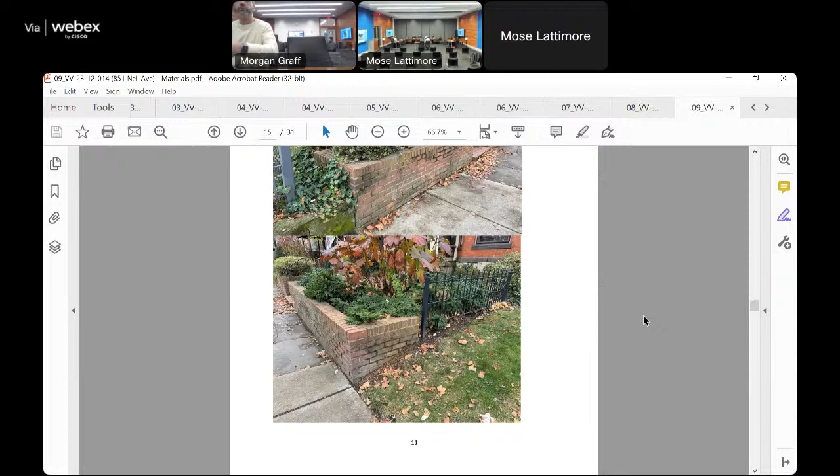That's really what I was trying to ask - are we trying to leave space for plantings or just not on top of the wall? I think plantings are always a nice touch. This one was responding a little to the neighbor's planting just north of that, which was already installed, and that kind of lines up with it - that was part of the conversation too. Just trying to find that balance, because every condition is a little unique. So that may prompt something on the wall that you need to work through as it relates to how the fence engages the gates - there's all kinds of little nuances related to that, so that's why we were asking.

Yeah, I appreciate that. Awesome. Okay, we don't have anything else, so no motion, and we look forward to next month. Happy holidays. Sounds good. Yeah, likewise. Thank you so much.